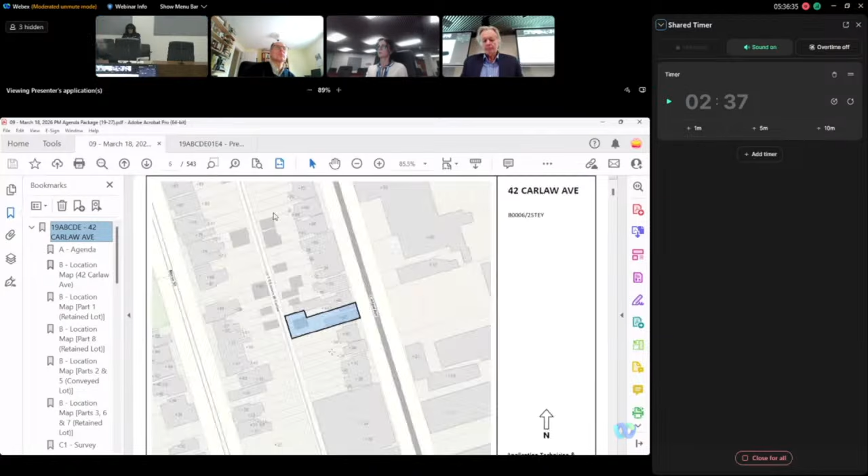Okay, do we have the agent? Through you, Mr. Chair, we have the agent online to speak, and we do have a registered speaker. I'm just making an attempt to connect with them. Sorry, the agent is online? Yes, hello. The agent is online, yes.

Hello, good afternoon. Name and address, please. My name is Ron from Seven Design, and the address is 42, 44, and 46 Carlaw Avenue. Okay, we only have someone registered to support this, so...

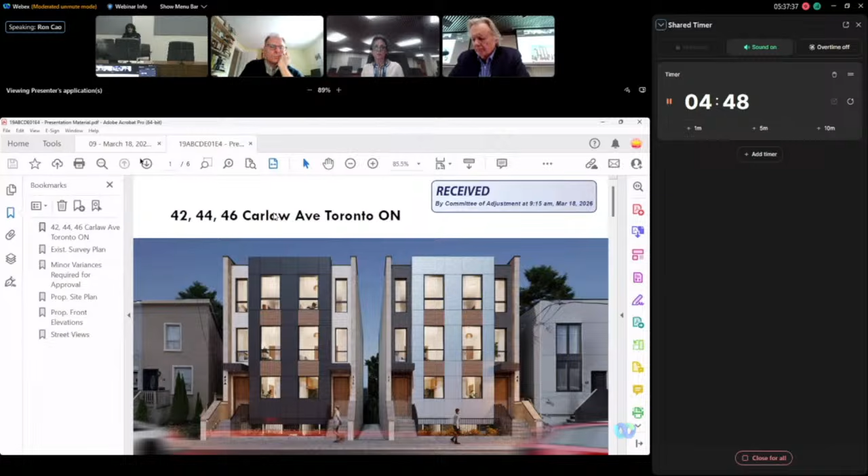It is a complicated one. Maybe you could just give us all a bit of an overview of what you're proposing. Yeah, sure. So just some background: 46 and 44 Carlaw Avenue are 2-story semi-detached, and 42 is a 2-story detached dwelling. So the proposal is to combine 3 properties, divide them into 4 lots, and construct 3-story semi-detached duplex dwellings on each lot. As for today, we are requesting 3 minor variances related to lot frontage, mean wall height, and building depth.

So the first item is the proposed lot frontage of 4.79 meters, where 6 meters is required. This reflects the existing lot condition, and with the reduced lot frontage, the design still provides a functional dwelling consistent with the neighborhood.

And the second item is the building depth. The proposed building depth is 19.48 meters, where 19 meters is permitted. This represents a very minor increase of 0.48 meters, with no negative impact to the adjacent properties.

And the last item is the mean wall height, at 10.81 meters, just slightly above the permitted 10.5 meters. The minor increased height is because the design intends to raise the basement level closer to grade in order to improve the natural light, and also, as per the TRCA requirement, all the basement windows need to be located above the floodplain, which also adds to the overall height.

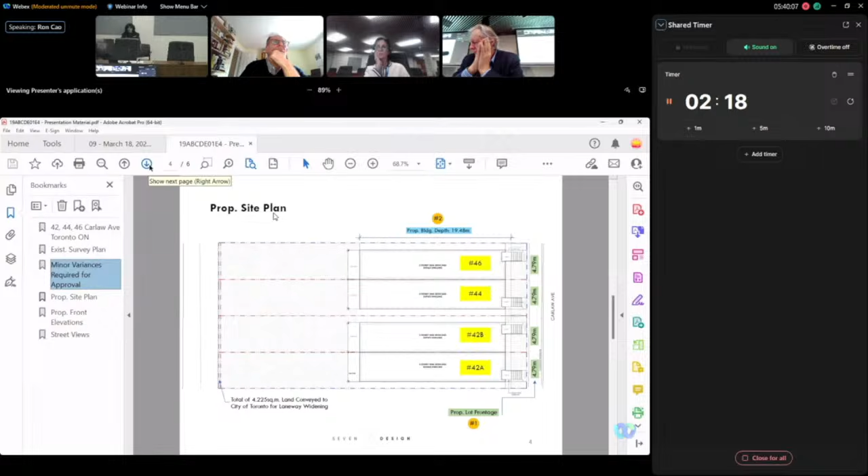It's our opinion that the proposed design represents a practical and balanced approach that fits within the existing neighborhood. We believe the 3 variances are minor, as they maintain the general intent and purpose of the zoning bylaw and official plan, and also meet the 4 tests of the Planning Act. Thank you for your time, and I would be happy to answer any questions.

Great, thank you very much, sir. Panel, any questions? Just a couple.

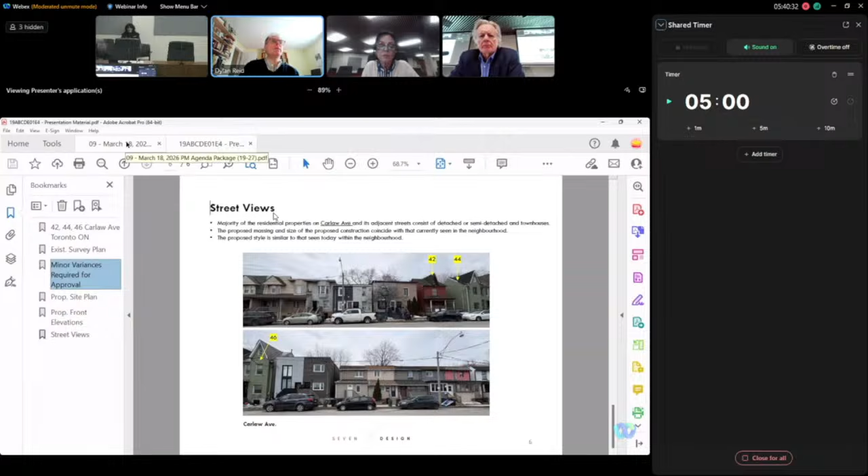Just a quick question - there's no stairs from the back. How are people going to be accessing the rear yards? Is it through the passageway between the two houses? Yes, they do have access from the ground floor. There's stair access to the ground floor.

Okay, I didn't see a door in the plans. This is a sliding door. So does the sliding door go to a balcony? Is there going to be one?

So the sliding door goes to the back deck, but are there stairs from the back deck down to the actual rear yard? At this moment, we might add that during the building permit stage - we're not sure yet about the landscaping design, so we haven't decided what to do with it.

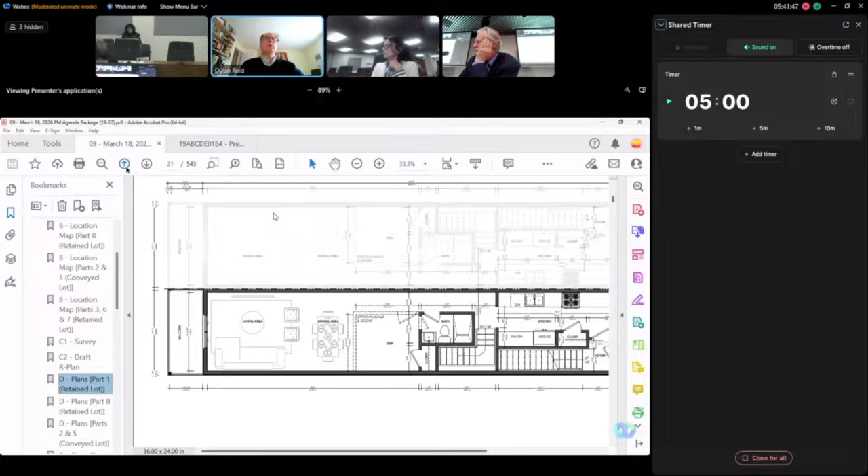I was just wondering because there was no obvious access. The other question is, how are you planning on managing the garbage bins? So basically, we're thinking to have the garbage bin located at the back of the property.

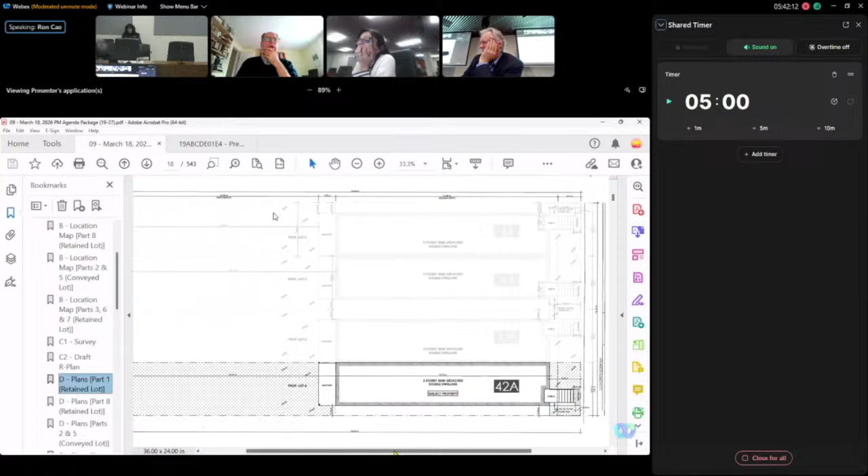Okay, you've got lots of space back there. Is there enough space along the sides for the bins to be brought forward, or will there be a paved pathway between the front and back? Yes, the minimum setback between the property line and the proposed dwelling is 0.9 meters - about 3 feet - so it should be more than sufficient to pass through.

At the moment you have soft landscaping at the front at that location, but I assume you can make that change and still be within the front landscaping requirements. Right, we try not to have any garbage bins at the front of the house - it's better for appearance. You have stone there. Also, if you look at the rendering, it's better appearing without any garbage bin and stuff like that.

Yeah, I think that's great - I just wanted to have an idea of how that was going to be managed. Okay, thank you very much, that's all I have. Anyone else? No? All right, thank you very much, sir. Thank you, we're in committee.

Did we want it? Was there a supporter we wanted to hear from? Oh, there's someone in support. Pardon me, thank you, Dylan. Yeah, did we find him?

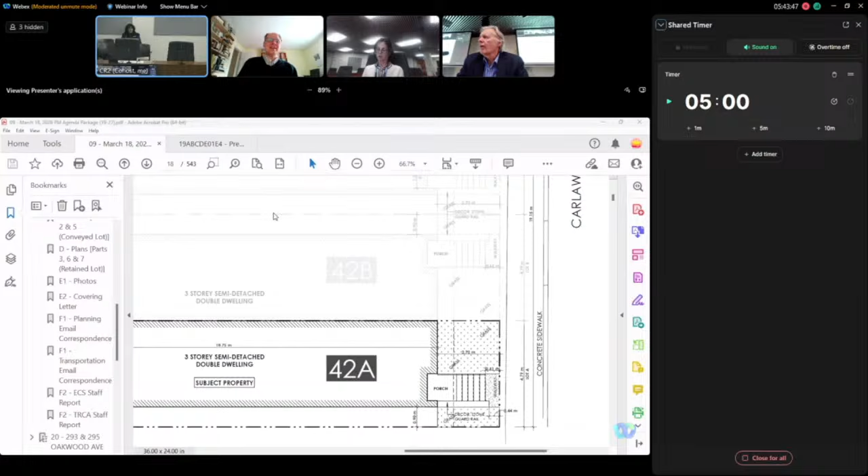Okay, I think we'll just assume that the individual is supportive. All right, let's go into committee.

Yeah, I'm happy to speak to this. I think this is a really good proposal. I'm impressed - first of all, I love having real duplexes. So often we used to see a basement apartment and then three stories, and it's not really a duplex. These ones are real duplexes, which is really nice to see, honestly. Also, there's no side yard setback issue - they've actually set them a decent distance from the neighbors, which is great. And they're actually spacious, giving good space for people without taking up a small location. Honestly, except for the actual width of the lot, the two variances are really minor. So I think this is a really good proposal, and I'm happy to support this.

All right, why don't you turn that into a motion, Dylan? Yeah, sure, I'll move to accept this proposal with the engineering conditions, development engineering conditions. Okay, motion by Mr. Reid, seconded by Ms. Crawford, all in favor? You have your approval, sir, thank you.

All right, item number 20, 293 and 295 Oakwood, has been postponed.

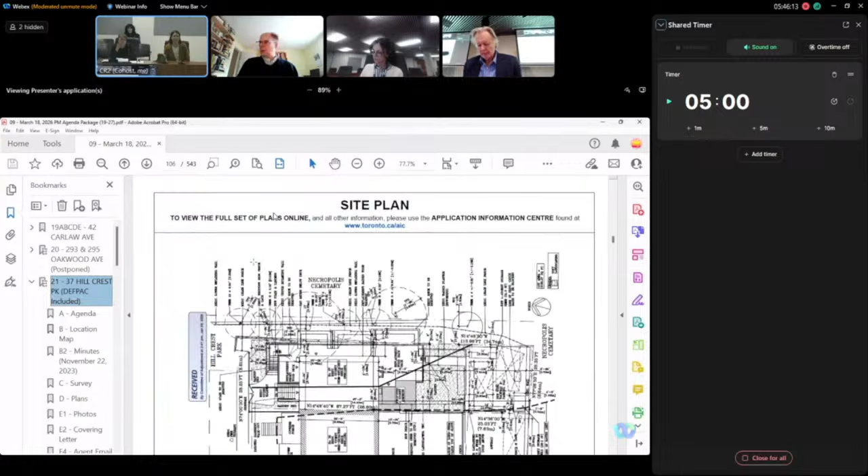Item number 21 is 37 Hillcrest Park. This is an application to alter the existing 2-story semi-detached dwelling by constructing a rear 1-story addition, also to reconstruct the wood deck and to construct a rear yard parking pad. Committee has before it a copy of the minutes from the November 22nd public hearing. We have a copy of plan of survey, site plan, floor plans, and elevations, 8 photographs of the subject property, a covering letter from the agent, letter and photo from the agent, another letter from the agent to the neighbors, supporting materials from the agent. We have email correspondence from Heritage Services and from Metrolinx. We also have staff reports from Urban Forestry and the TRCA. We have correspondence in opposition from 33 and 35 Hillcrest Park, and materials in opposition from 35 Hillcrest Park. That's it.

Hello. Is your mic on? Now it is.

My name is Monica Kuhn. I'm the agent for the owner. Sarah McCarty Carton is beside me, she's one of the owners.

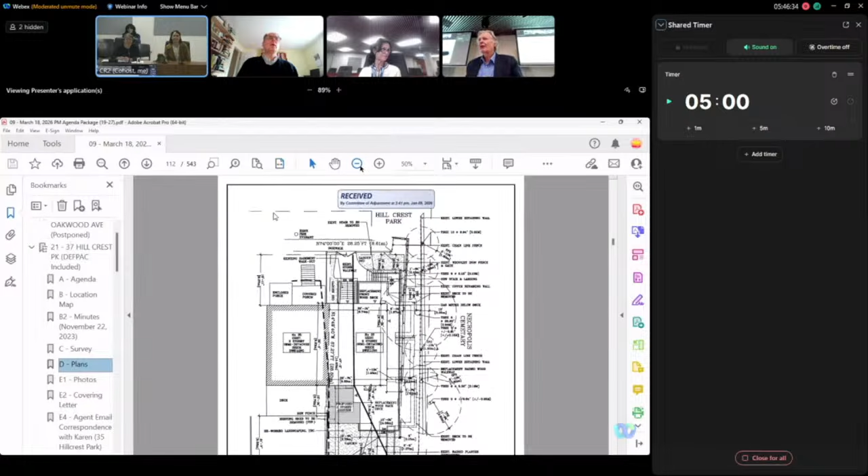Okay, well, we have some folks who want to speak to this item, so we'll need a presentation.

So just to give you a bit of context, this property is at the end of a row. It faces a park, and to the north, east and south it's surrounded by the Toronto Necropolis Cemetery. This whole row has no street access facing the park, so the fronts all face the park with no street access, and there's a laneway in the back. Because our property is at the end, our property is longer, so we captured the end of the laneway in the property.

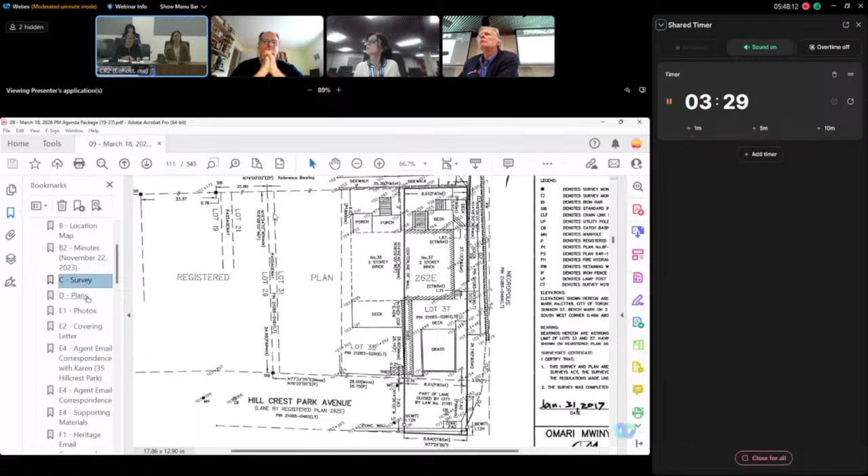Also, a bit of history. The previous owner of this property liked to do things on his own without any approvals. Not only did he build a string of sheds along the shared property line with number 35, which also go over the property line onto her property, but he also built a deck along the east side that goes over private property onto city property, without a permit. Part of our original work was talking to the city to see if they were interested in selling that piece of property, and in the end, the decks are starting to rot, and we really need to replace them, so we are just going to replace them on private property and get rid of all of that overhang.

It's part of a ravine system, so we have to deal with TRCA, which you have documentation about. They are in agreement with where and what we're going to be proposing. So that's a bit of the history of that.

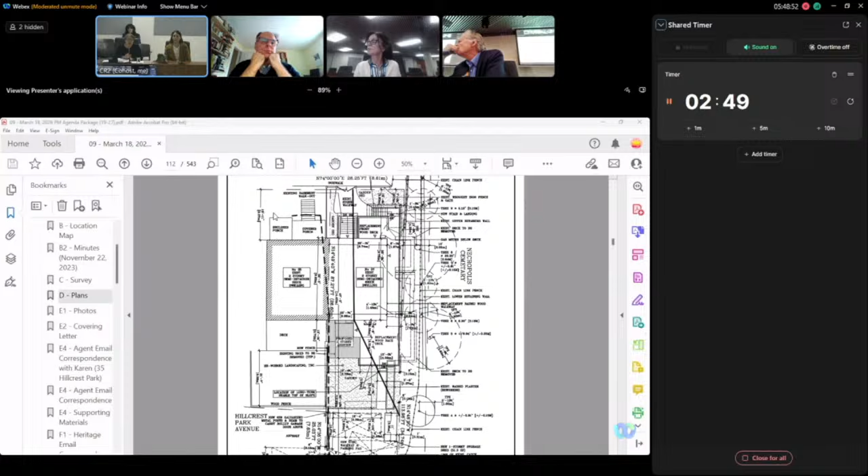We came to you originally in 2023 with a rear addition as well as a laneway garage and laneway suite at the back. Due to budgetary constraints, we're now just coming to you with the rear addition and the reduction and reworking of the decks. To be very clear, the rear addition has no variances, so we could go tomorrow and get a permit for the rear addition.

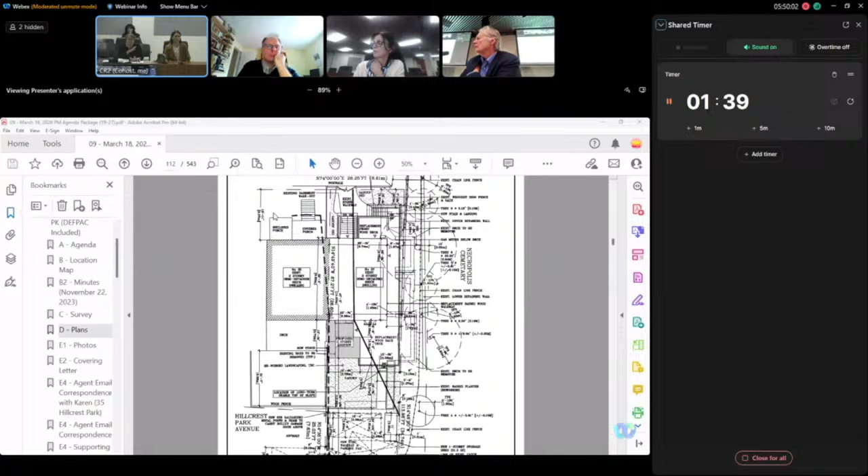The variances have to do with the decks and the landscaping. Right now, the property has not much green space at all in the back. There's a wide deck that goes across the back of the house, then there's an area they use as a patio covered with gravel, which is not soft landscaping, and there's already a double parking space at the back at the end of the lane, like an extension of the lane into the property. So with our proposal we have attempted to increase the amount of soft landscaping both at the front and at the back.

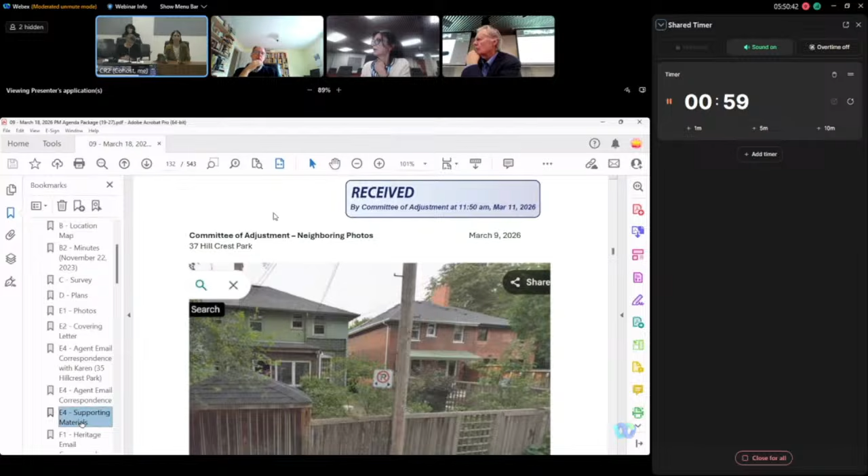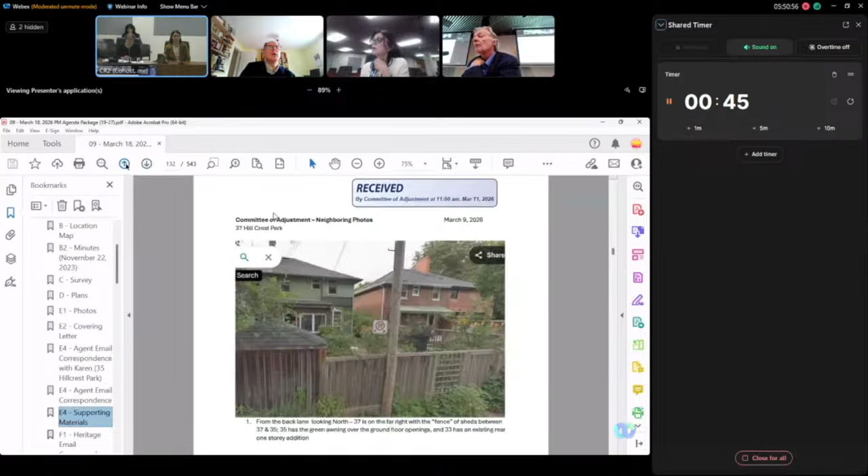All right, let me quickly go through. You've got the letter that we sent to the neighbors. The first variance has to do with the rear deck side yard setback - typically the deck needs to be set back 0.9 meters from the side property line, and we're proposing to take it in to just 0.15 meters from the east property line. Right now the deck extends over that property line, probably another 6 feet or so into the city property, so we're going to be cutting that back. Variance to the side deck side yard setback...

Same thing - it can encroach into the side yard 1.5 meters as long as it's no closer than 0.3 meters, and we're going to be encroaching 0.66 meters, but will be 0.24 meters from the east property line. Again, that deck currently extends over the property line into city property.

Rear yard soft landscaping - the zoning bylaw requires 50% of rear yards to be covered with soft landscaping. Currently we only have 10%. With the situation I told you - we've got the parking already, we've got the gravel terrace, and we've got a deck - we are now proposing to increase that to 29%.

Variance number 4, front yard soft landscaping. The zoning bylaw requires 75%. Currently we were at 56%, and we're going to 65.2%, with a reduced front deck.

Number 5 is the standard TRCA requirement to be set back 10 meters from the top of slope. The top of slope right now runs right through the middle of the existing house, so their requirement to us was to make sure we did not pass that top of slope line with the addition, and they have approved the location and size of our proposal.

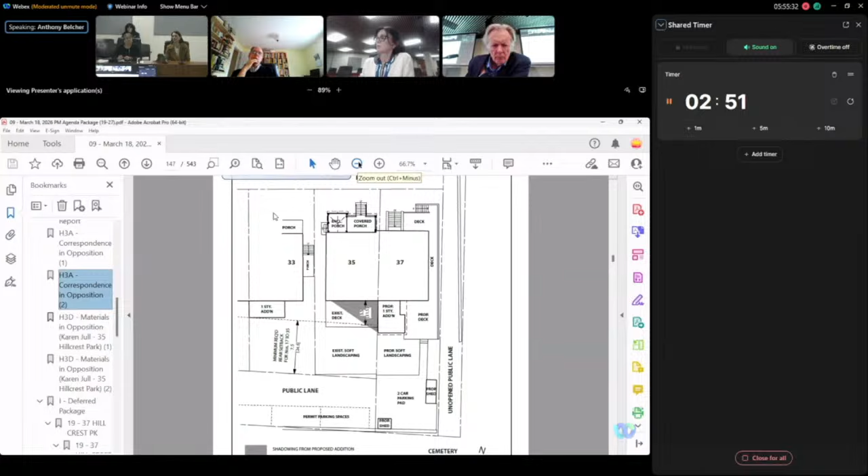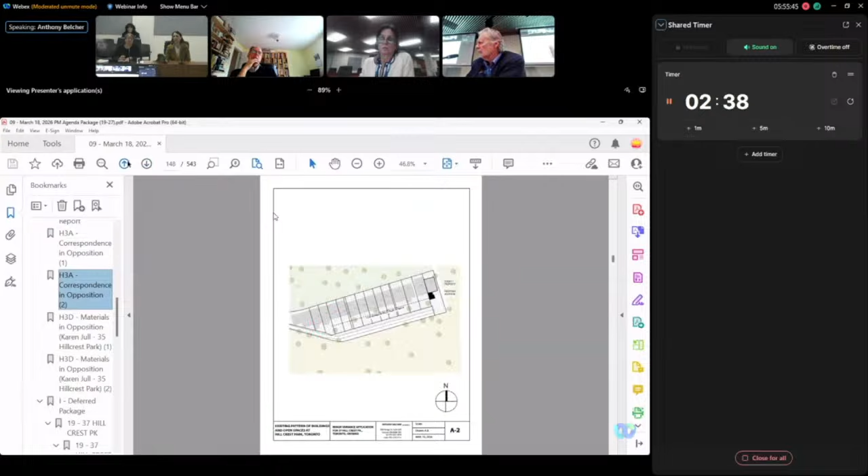Currently, only 28.6% of the rear yard would be maintained as soft landscaping. A building permit for the rear addition would only be issued if the two proposed sheds are deleted and the areas of the two-car parking pad and/or proposed rear deck are scaled back. Currently, the parking pad and proposed deck together make up about 55% of the proposed rear yard area. By choosing to make a deeper rear addition, the applicants have reduced the overall area of the proposed rear yard, thus exacerbating the insufficient percentage of soft landscaping.

With a greater rear yard depth, they ought to be able to comply with the bylaw requirements for rear yard soft landscaping.

There's a context map we could look at, that one there. So a large majority of the properties in the row do have rear yards which comply with the minimum required 50% soft landscaping.

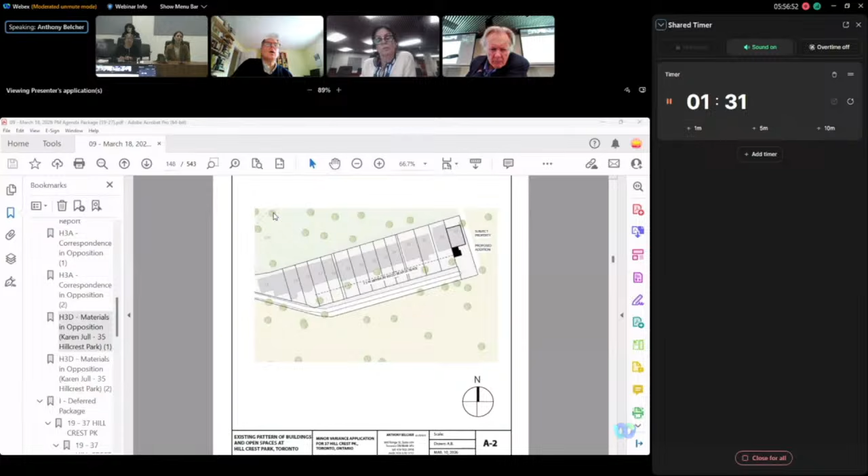Of the 14 properties, 9, including numbers 33 and 35, use permanent parking spaces on the south side of the public lane. They do not park in their rear yards. One, number 11, parks in its side yard. The remaining 4 have parking in their rear yards, and all but the subject property only have a single car parking pad. Only the subject property has a double car parking pad.

Both my client and her neighbor at number 33 oppose variance 3 of this application based on the proposal's nonconformity with the existing neighborhood pattern for depth of rear additions and percentage of rear yard soft landscaping.

By refusing variance number 3 related to deficiency in rear yard soft landscaping, this committee will require the applicants to revise their proposed site plan so it complies with the zoning bylaw. Such changes might well include reducing the depth of their proposed rear addition in order to increase the overall proposed rear yard area. From my client's perspective, that would be a good outcome to ensure her continued enjoyment of her property.

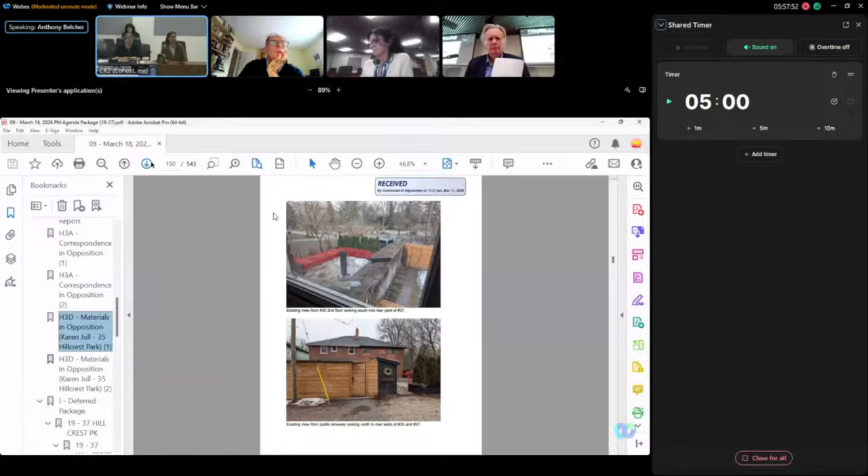Good afternoon, Karen, you've been unmuted. She's just the observer? She's the owner, right? I think Anthony was speaking on her behalf. Okay, that's right, all right, okay.

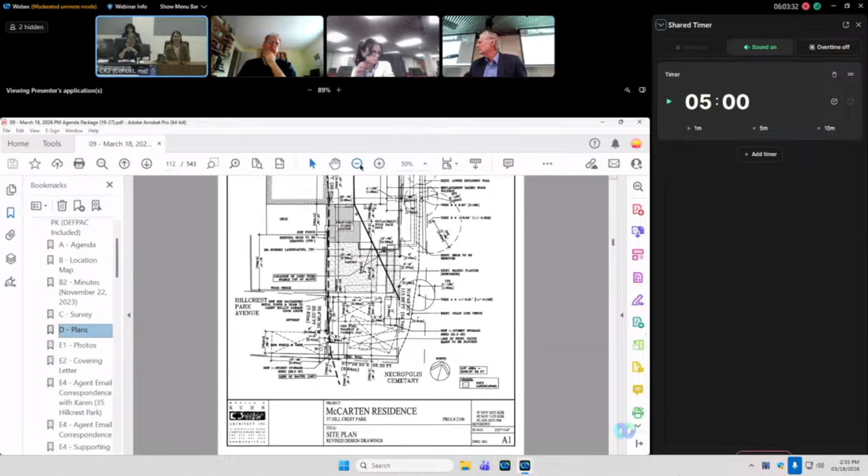As well, regarding this anomaly of the row at the back—there's nothing to say that one property can't be bigger than another, and the zoning bylaw relates to the size of the property, not how big the neighboring properties are. Further down the other end of the lane, the properties are a very different size, much smaller—they don't even have backyards because the laneway cuts right behind the houses. So I'd say this row is not uniform in the least at the back.

In the front, certainly facing the park, it's pretty uniform, except for the neighbor at number 35, who has the only front addition combined with a front covered porch in the whole row as well. So again, we're talking anomalies.

Can't have it both ways. Anyway, I think that's enough. All right, thank you. Thank you. Any questions of the agent?

Dylan, you okay? Yep. All right. Thank you very much. Okay, we're in committee.

I'll just say that if we do accept the variances, I definitely think we should include a condition for permeable pavers for the parking spots. Yeah, I would agree, I thought this was a reasonable application. I think the agent stated, and I think she's right, that the small addition is basically as of right, if it wasn't for the landscaping, the incursion onto the backyard and the impact on landscaping. But the fact that it's improved over the existing, and with permeable pavers for the driveway, I think it's quite satisfactory. It also is surrounded by green space, creepy green space, but green space nonetheless.

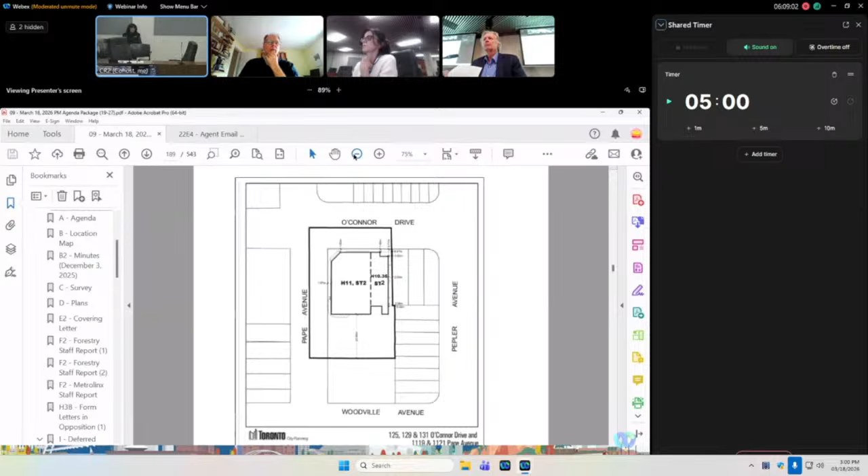Committee has before it a copy of the minutes of the December 3rd, 2025 public hearing, copy of the plan of survey, site plan, floor plans, and elevations, a covering letter from the agent, email correspondence with the zoning examiner, staff reports from Urban Forestry, and an advisory report from Metrolinx. We also have correspondence in opposition from 133 O'Connor Drive. Through you, Mr. Chair, we have the agent online to speak for this item, and we also have a speaker in person and online for this item. Okay, if we can have the agent, Mr. Palumbo.

Good afternoon, Mr. Chairman, members of the committee and Committee of Adjustment staff. My name is Andrew Palumbo of Ian Hall Planning Limited, and I am the planner and agent for this application. My address is 38 Betty Nagle Street in Toronto, Ontario.

I will try to be brief. This application was deferred back on the December 3rd hearing to address comments from city transportation staff, who requested that one accessible parking space be added to meet bylaw requirements, eliminating the variance to reduce accessible spaces by one. My client accommodated this, and the proposal now provides the required 2 accessible parking spaces, so that variance is no longer applicable. It's just the 2 variances for height, as I will explain.

For background, back in 2019 the city enacted a site-specific official plan amendment and zoning bylaw amendment approval for the subject lands, allowing a 2-story commercial building up to 2,000 square meters in size, whereby the approved second story was only a partial story.

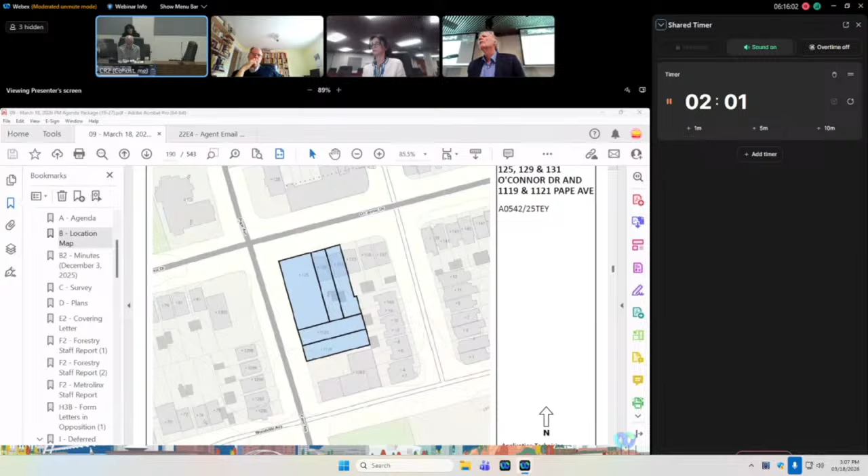For these reasons, I respectfully submit that the proposed commercial development of this vacant property should be reconsidered in favor of utilizing existing vacant properties within the area, and also taking into account the two very large developments going on at Pape and Cosburn. Thank you. Thank you, sir.

You live one street over. Is there an impact on you from this? Yes, the back of our property - my life partner is with me - the back of our property is on that lot. So you would face this property, the rear would face it? Yes, correct. Our back fence would be on the property line.

So you're unhappy with them doing a 2-story building here. What would you prefer seeing? I was hoping you would ask me, Chairman. I was hoping those two very large commercial developments I mentioned, which have large residential areas in them, but neither of those buildings come close to meeting the parking needs for their residents. So I was going to suggest the city should purchase a property and develop parking only, no taller than 2 levels, as a parking facility for residents in the area given the new development going on. So you'd prefer a parking structure to this building?

Yes. All right, thank you. Thank you, sir, thank you for your time.

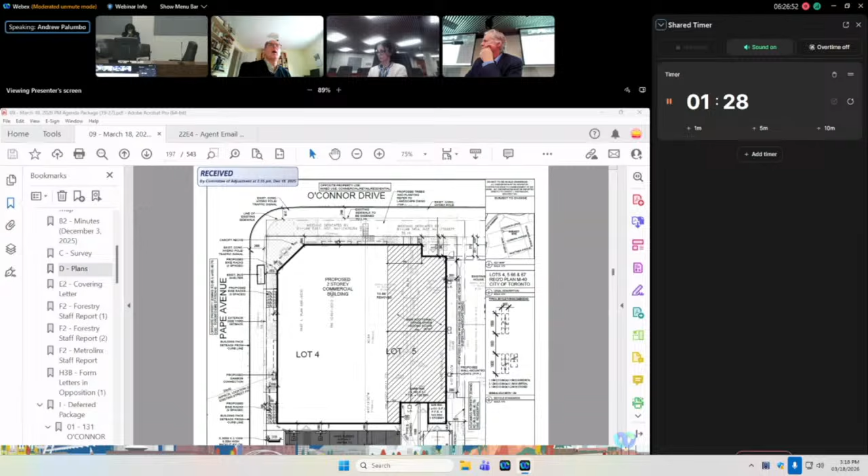One last thing, Mr. Chairman, is that we have worked in close conjunction with city planning staff. I know they haven't submitted a report, neither opposing nor supporting, but we have been in contact with planning staff to try and get this vacant site developed and moving forward, because there is an open SPA application that they would like closed, and this is just the one step that stands in front of that.

I was just going to give you the opportunity, I think you've already done it, to respond to the committee's direction during the deferral that you try and address as many of the concerns of 133 as you could, and it sounds like you've spoken to that already.

Yes, Mr. Chairman, I did submit a letter. That was a point-by-point letter that spoke to the points that the deputant from 133 raised. And like I said, happy to try and be the point of contact for that individual going forward until it reaches a certain point where I, as a planner, am no longer involved.

And the individual who spoke that lives on Pepler raised a number of options. I assume in your business plan and modeling you've already considered those, and this is the site you're proposing to develop on.

Absolutely, my client has chosen this site. As I said, this has been vacant for some time, and it's just a matter of getting, in the market that's there, the commercial market specifically, it would be good to have a tenant eventually have a site to come to now in this particular corner.

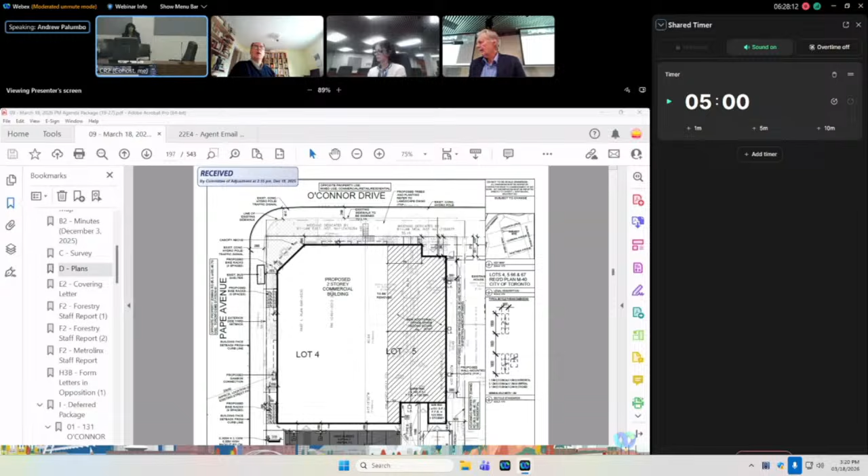All right. Okay, thank you, sir. Any questions of the agent panel? I can't see, Dylan. I'm here. Welcome. I just have a couple of questions.

First of all, I guess I'm assuming that the original bylaw was to step down towards the residential spaces. Is that why they had that? Okay, and just for added context, Mr. Reed, I've been involved with this application since it was originally submitted. As far as I'm aware, my understanding is that the main reason this additional GFA is being requested is that there's a commercial tenant that basically needs it.

So given the change in policy direction, the fact that a 6-story building is now contemplated here as of right, this is just a minor addition in the context of that city policy change. So originally was it a response to local comments? Yeah, and that was actually established through comments from a working group.

Okay, thanks. And I noticed that you have actually stepped back the building a little bit where it meets the residential spaces, is that correct? There's a little notch on the north and south ends. That is correct, just to not make it so massive, so to speak, and to continue to provide that transition. Right, okay, thank you. All right.

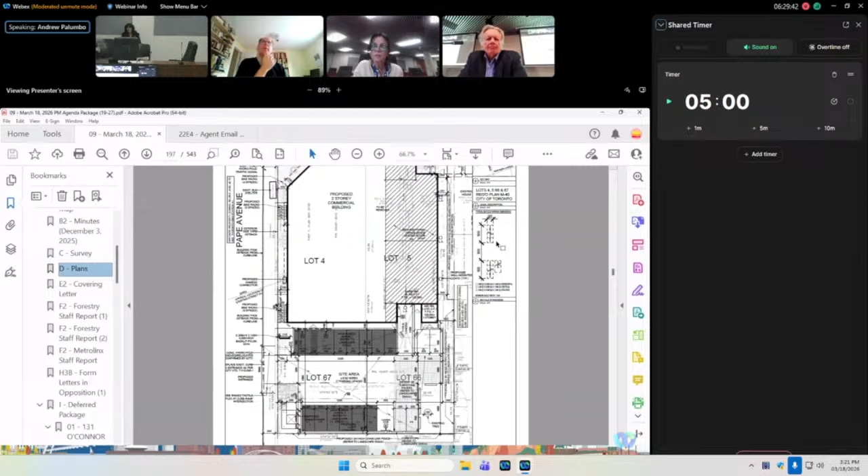Okay, if no further questions, then let's go into committee. I'm happy to take this one. I know this site very well because I often drive by it, trying to get to the DVP. This has been vacant for a really long time, and it's at the intersection of 2 major streets. It's really good that this is being developed, and I think it's excellent to see this moving forward. And that stretch of Pape is a little underused, but I think this may actually help address that issue.

I would also say I agree the context has changed. The city is very much encouraging larger developments on major streets, and this is still only 2 stories. I also point out, I understand the houses beside it are currently bungalows, but basic zoning would allow houses of almost this height to be built there, should someone want to. So it's really no higher than a house would normally be. I think it's entirely reasonable, and I'm happy to move approval of these variances.

All right, there is a forestry advisory and a Metrolinx condition? No Metrolinx, just advisory? Yep, just advisory. I think the forestry is just advisory too, right? Yeah, it is. It's not a condition, okay. Correct. So I don't think there's any conditions. So do we want to... yeah, okay. Motion by Mr. Reed to approve, seconded by Ms. Crawford. All in favor? You have your approval.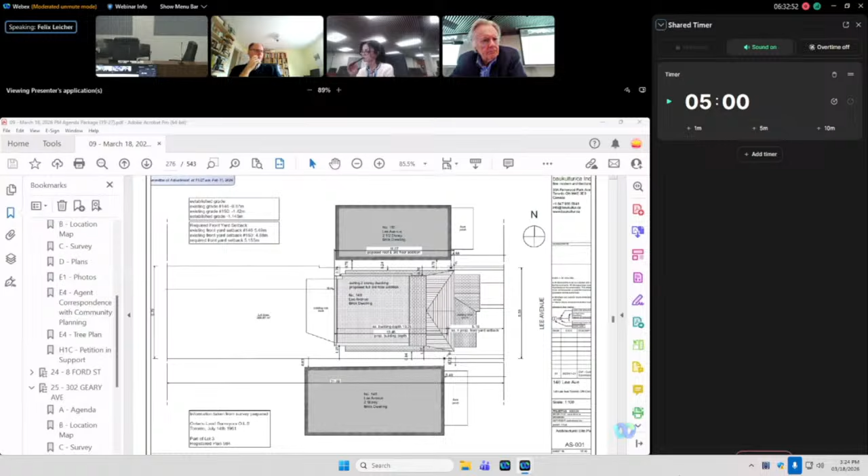Okay, panel, does anyone need a presentation on this one? No, I don't think so. Okay sir, we've read your application, we're familiar with the material, we don't need a presentation today. Is there anything you'd like to share with the panel before we take it in for a decision? I believe you have all the necessary information that the materials have provided. Okay, all right, thank you.

All right, we're in committee. Ann, you want to take this one? Sure. I'd like to put forward a motion suggesting approval of this application. There's some increased height in the back, but no significant massing or change to built form. The depth and the rear yard setback are much less than as of right. It's been discussed with community planning and all the neighbors are in support, so there's no adverse impact.

Okay, and you're making a motion to approve? Yes. All right, motion by Ms. Crawford to approve, seconded by Mr. Reed. All in favor? You have your approval, sir. Thank you.

Move on to item number 24, 8 Ford Street. This is an application to convert the existing rear one-story ancillary building into a two-story ancillary building that will contain a laneway suite, occupying the north portion of the ground level and the second story, by constructing a second-story addition with a second-story balcony. There will be a total of 3 residential dwelling units on this lot. Committee has before it a copy plan, survey, site plan, floor plans, and elevations, 4 photographs of the subject property, email correspondence from Transportation Review and from Metrolinx. We also have correspondence and support from 6 Ford Street, right next door.

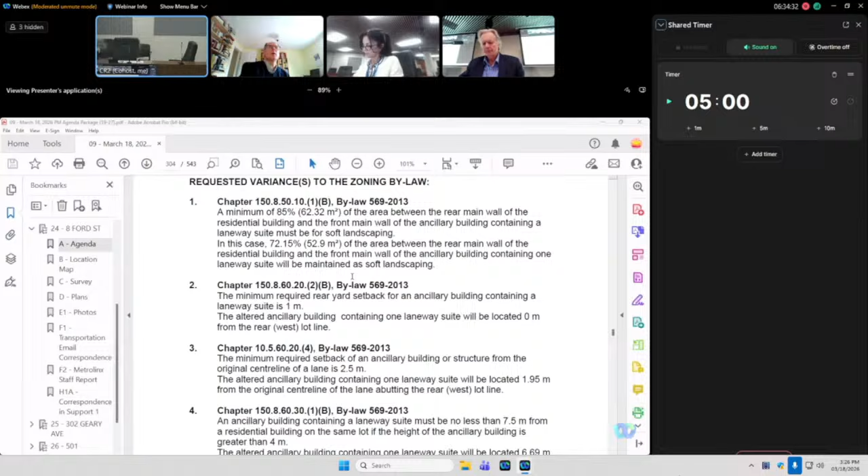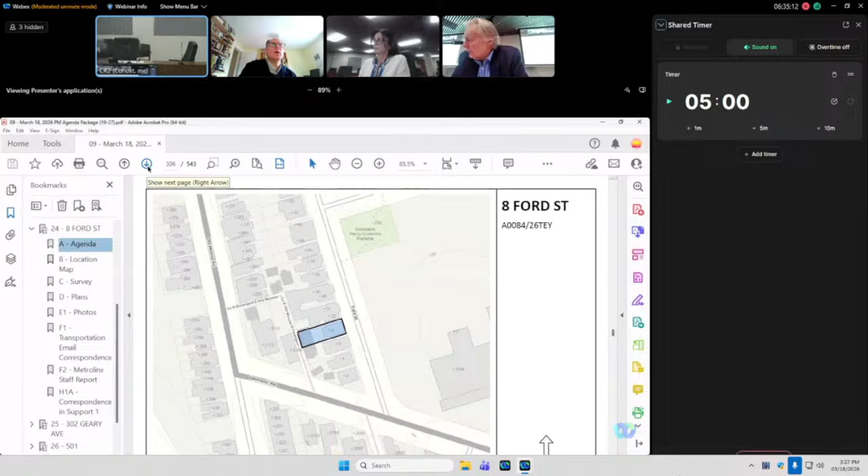Okay. Panel, does anyone want a presentation on this one? No, we don't need one. So, Mr. Lopes, we don't need a presentation today. We've read the application, we're familiar with the material, and we may have questions. Is there anything you'd like to share with the panel before we do that?

Just final remarks. Absolutely, this is a very unique situation. We did our best efforts to create a very straightforward application that you have before us. And yeah, very simple.

Panel, any questions? Seeing none, all right, let's go into committee. I think it's a fairly straightforward application.

So I move for approval of the application, the conversion basically. The variances are minor. There's a bit of height in the ancillary building, but they're achieving another residential unit. And there's support from one neighbor. I think there may be a condition, or maybe it's just the warning condition from Metrolinx. Otherwise, I move to support.

Motion by Ms. Crawford to approve, seconded by Mr. Reed. All in favor? You have your approval.

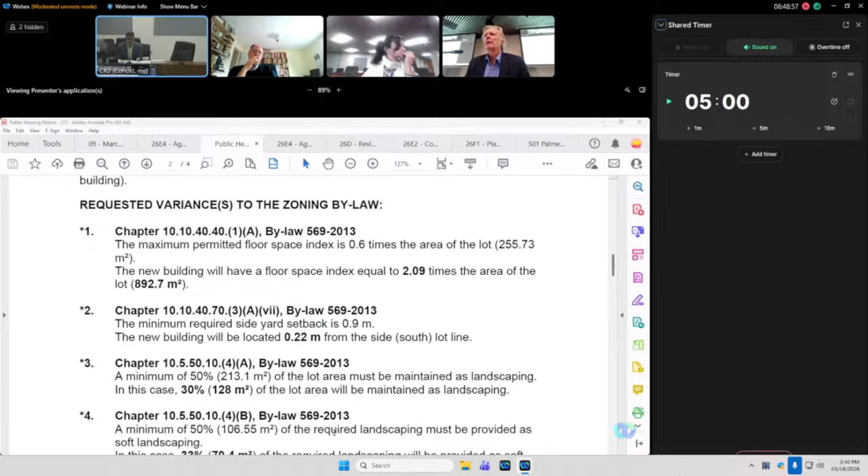Yeah, through you, Chair. We initially - I don't remember the exact date when they were all submitted - but that description wasn't updated after we provided the new plans. I believe the new plans were provided end of February at some point, or something along those lines. I mean, you can check online.

So like it didn't happen like 2 days ago? No, it's just that the description. No. Okay, hold on. You guys, hold on a second - on the public record you'll have your opportunity to share your thoughts. I'd ask you just to kind of keep quiet for now, please.

Sorry, sir. Yeah, I can pull up the exact date if you'd like of when the plans were changed. You probably have them because they usually stamp when they were accepted by C of A. Yeah, we initially had submitted with the same plans as a placeholder, and then we amended them to this revised application. I am going to, at some point when you have an opportunity, I would like you to confirm the date that those plans have been made public.

Do you want me to do that after the presentation? You can do that after your presentation. No problem. Yeah, but there was plenty of time.

Through the chair to the agent, it may be prudent to go through the red line public notice that you submitted. Staff can pull that up on the screen so you can clearly go through the variances, the changes for the record. Absolutely, and it's also very important to note that every change has been an improvement in the variances or a removal of a variance, so in no way have we changed anything that's made the proposal worse. So we'll walk through - sometimes the public doesn't always get an opportunity to see the most recent changes, so this is important from a public disclosure perspective to reinforce that.

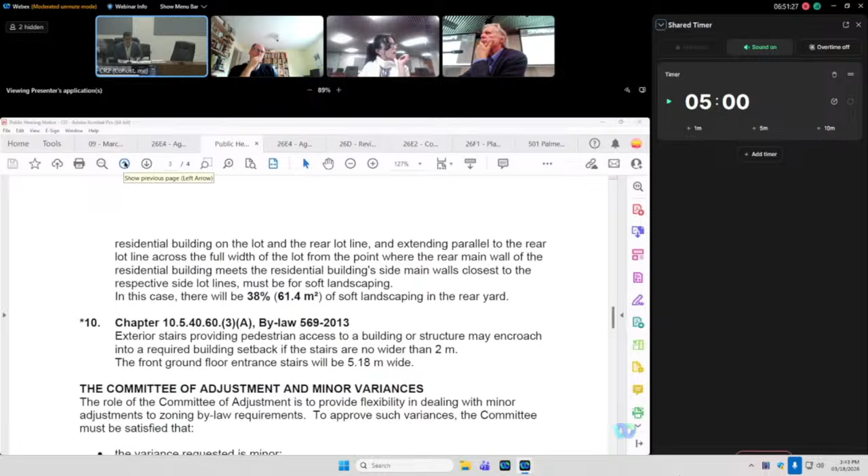There was - I believe the neighbors will bring up the fact that there was another public notice sent out prior to this, which was identical to the original hearing. But this is the one that came out, I believe, a week after that one was sent out. Okay, and this is the one that was with the new plans. It had, and where we reduced the variances further.

So you've eliminated variance 7, which is the visitor parking spaces? That's correct. So you're providing those? It's in an MTSA, which is now implemented. Fair enough, therefore they're not required. Last time when we were here in November, those were not implemented - fair enough, and now. Yeah, and then similarly, number 8, the same reason. That is correct. Okay, any other changes?

Doesn't look like it.

Through you, Chair, sorry for the confusion here. It's a little bit complicated. No, and it's important because there's a lot of people interested in this file, that we're abundantly clear. Just out of curiosity, why are the variances asterisked?

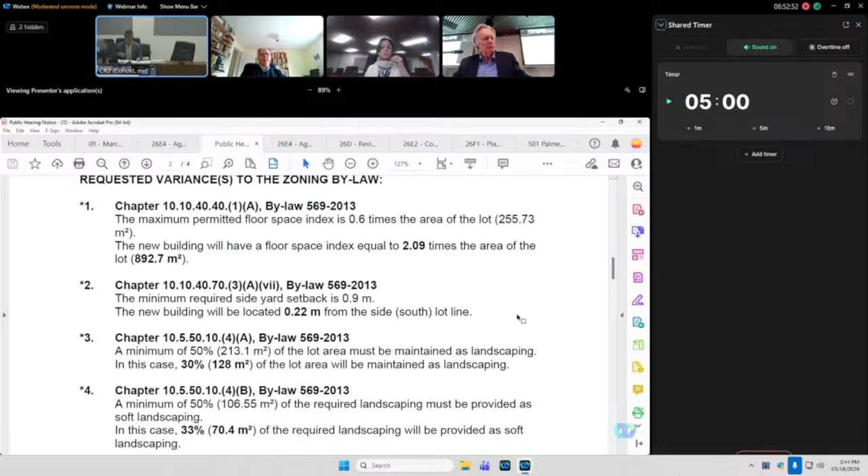Through you, Mr. Chair. Originally, staff sent out the first public hearing notice. After that notice was sent, but still within the prescribed time period, additions or changes were made to those variances, so staff was able to send out a revised public hearing notice. That's the asterisks, as you'll see - those were the variances that were changed that were sent out to the public. Subsequently, the agent further changed the variances with their red line notice dated March 16th.

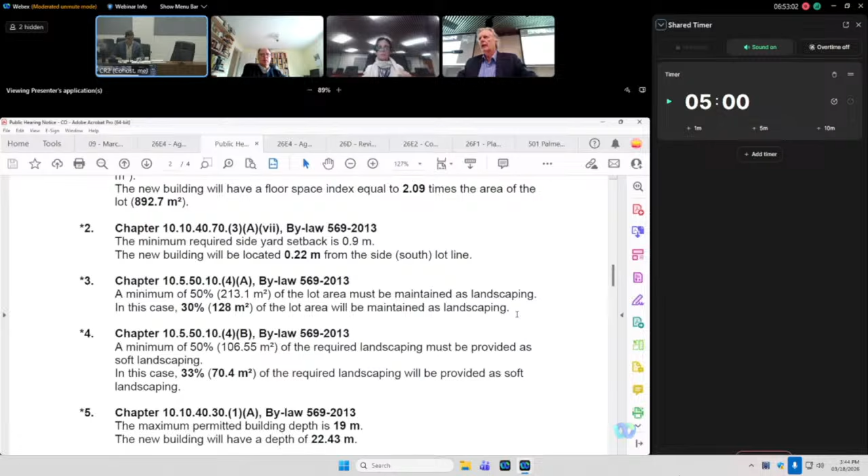I noticed in your presentation, which I will ask you to take us through, you have identified where you are now relative to where you were when you were here before the panel previously. So that's really helpful to do.

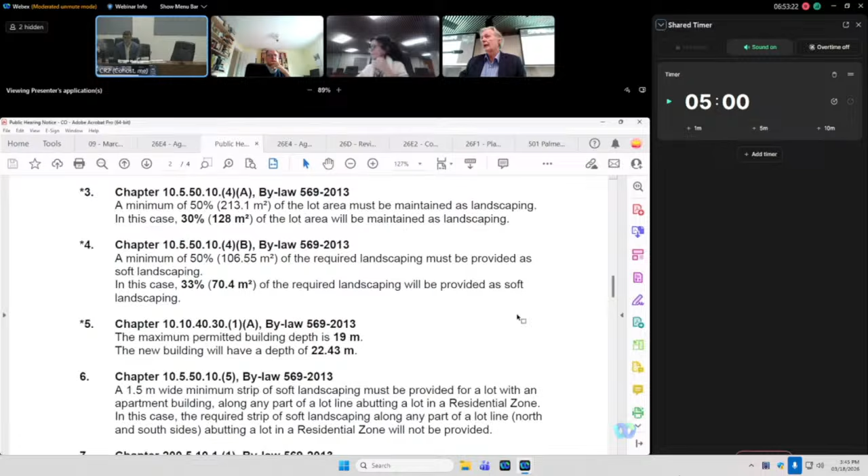Before we do that, can you talk a little bit about your application which you've set aside to go to TLAB to appeal the previous refusal? What are your intentions? Our intentions are, if we're successful today, to drop that TLAB appeal. It was out of an abundance of caution - these types of projects, time delays are very, very costly, so we filed a TLAB appeal as a contingency, right when the November hearing loss happened, and we communicated with TLAB that we would be withdrawing it if we are successful here today.

Do you still have a date at TLAB? Not yet, we told them that we're adjourning it, I believe is the correct word. Is what's before TLAB the revised one we're looking at now, or the older one? We appealed the original one, so what's in front of TLAB, we haven't done anything with that appeal, but it's the appeal of the original one. If you ended up not being successful today and went to TLAB, would you be revising to adapt to the current one, or would you stay with the original? We'd have to take that back and make a decision - I'm not sure exactly at this time.

Okay, thank you. Are there any more clarification or technical questions of the agent? I think we're good. Sir, you do have a presentation. Absolutely. It'd be great if you took us through that, please. Absolutely, thank you so much.

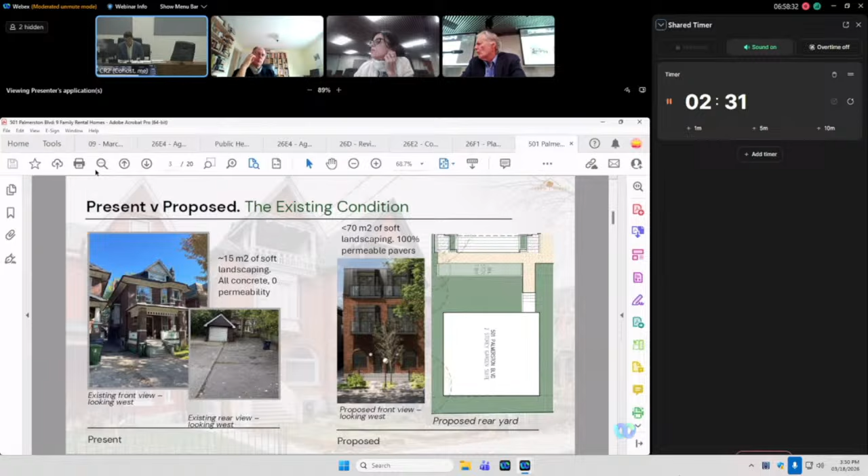In our new proposal, we are suggesting to increase the soft landscaping by almost 500%, to over 70 square meters, and have permeable pavers on all the new footpaths for entrances. We're going to improve the conditions significantly compared to what exists currently.

We have a proposed massing relative to what's allowed as of right now. This is what it looks like from a pedestrian walking by—very much in line with what's allowed. But I'd also like to point out that this is located within the MTSA. In the summer, the height allowance here is going to jump to 13 meters, so what we are proposing, at 11 meters, is going to be less than what's allowed as of right. This is what the province has mandated and what the city is implementing right now.

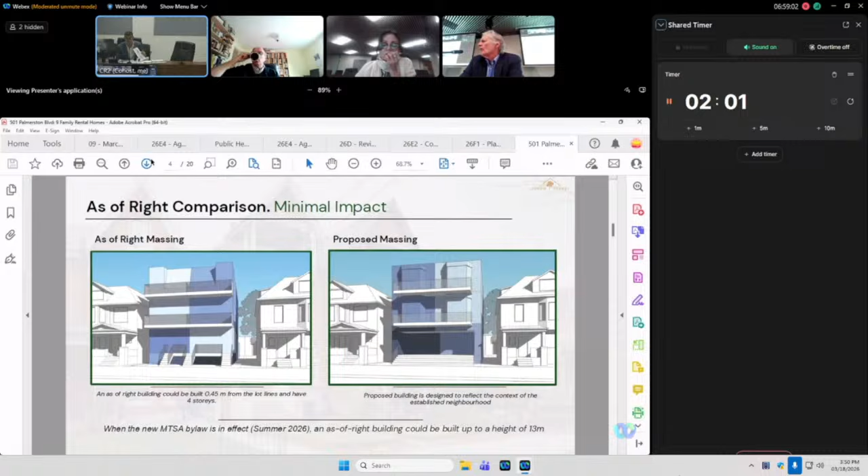We're not asking for something out of the box here—these kinds of typologies exist in the neighborhood right now. This depth exists in the neighborhood, and when you go to the corner lots, those are even deeper, around 30 meters. One more clarification relative to the previous proposal: previously staff said the as-of-right allowance of depth was 17 meters. It's actually 19 meters for this building. So we're asking for a truly minor change from 19 meters to 22.43, which is in line with the character of the area.

On the side yard setback, we're asking to match the existing condition. There are currently 6 windows overlooking the south neighbor, and we're going to be reducing that, so we're going to be improving the condition. On the right, you'll see some photos of zero side yard setbacks—the point here is we're just matching what's there right now. There are worse conditions in the area.

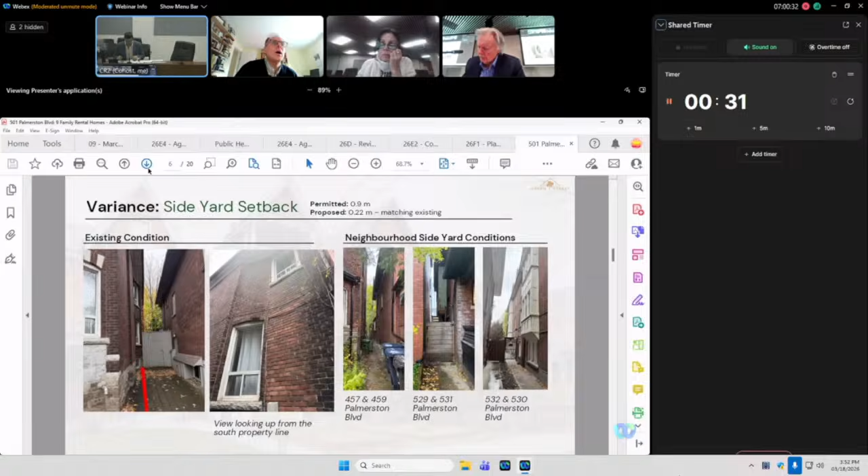We're 250 meters away from the Bathurst subway station. This is a walkable area—you can reach every single possible amenity. At the last hearing, the committee said this is a good proposal, but just not here. I'd like to push back on that. If we can't make gentle density work here, where you can walk to a grocery store, a university, a school, a rock climbing gym—literally anything you possibly would want—where can we make the EHON objectives make sense?

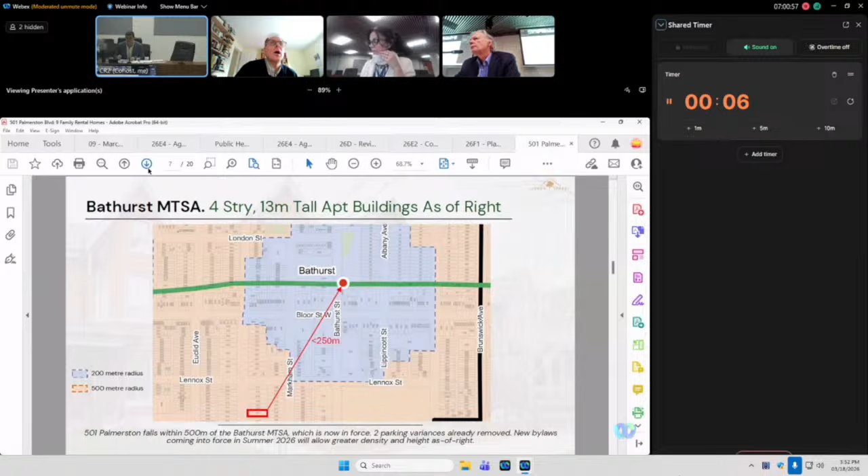Next slide is urban forestry as approved.

Sorry, I'm going to give you a little bit more time. I think you need less time than a minute—just to wrap it up.

If you go to the next slide, it's just the 4 tests. I want to say that we respect our neighbors' local engagement clearly with this process. The committee's role, though, is to evaluate this application against the 4 statutory tests. Community sentiment is important, but that's not one of the tests.

We've demonstrated that what we're proposing and the variances are minor. We're matching what's already approved 2 houses north at 22.43 meters at 509 Palmerston. We're matching the existing side yard setback. We've improved the metrics across all the variances and removed 2 of them.

And in terms of desirability, we're providing 9 purpose-built rentals averaging 1,200 square feet. 4 of those units are over 1,800 square feet in size. We're greatly improving the soft landscaping and permeability of the site relative to what exists there today.

We're also very much in line with the intent of the official plan. We're adding gentle density and critically needed family housing to a transit-rich area and dedicating 80% of the square footage to family homes within the Bathurst MTSA, thereby supporting the objectives of EHON.

And finally, we're very much in line with the zoning bylaw intent. We respect the surrounding physical scale, provided ample examples of deeper apartment buildings. This is a form factor that exists in the area today. We're conforming in heights, stories, and coverage.

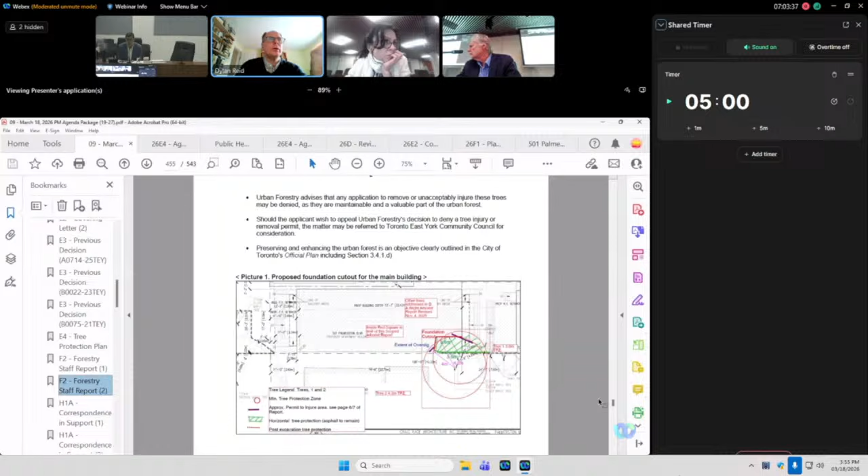So doesn't that mean that you're also going to impact one of your units? Because don't you have a unit in the basement there? Well, we'll have to plan around it. The issue is we don't know exactly where the roots go. There's concrete in the back right now, so the roots might go further or not, depending on where they go, we'll have to adjust. That's part of the process when we're doing the building permit.

I see, so you may have to adjust, but you're not sure because you don't know where the roots are going. What we've done right now is proposed a cutout that goes to the edge of the TPZs, and that is what Urban Forestry has accepted, and we'll use helical piles. There are so many unknowns when you start doing a root excavation. We'll obviously have to address Urban Forestry and get their approval again in order to get a building permit, particularly implementing their conditions, which we're very much supportive of, but there's no risk from an Urban Forestry perspective at this point.

Okay, but I just want to clarify that it looks like this would affect one of the basement units on your site. Potentially, yeah, and we'll have to plan around that. It might have to cut it down, we might have to drop a unit, but that doesn't trigger any variances, obviously. We just don't know the quantum of that cut back. What we're showing here is the maximum amount that we will, and we've accounted for that in the building process. I think that's important for everyone to understand.

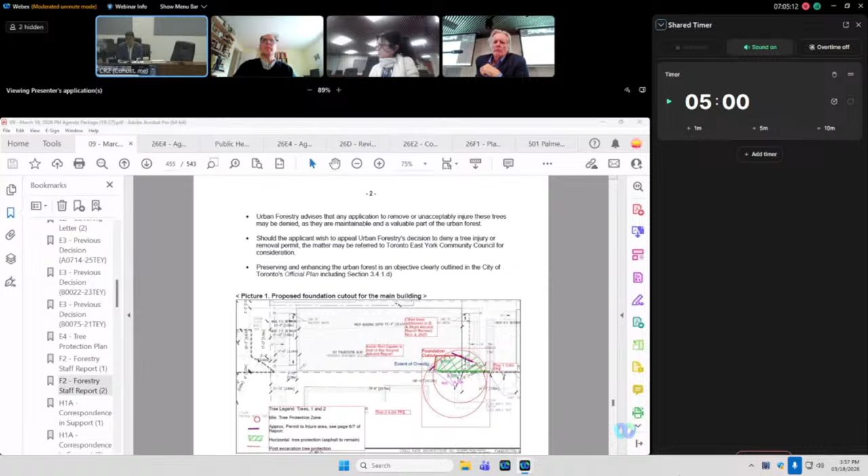Absolutely, and the building permit stage is really where we drill down on that and finalize exactly where that is. Obviously it can't be bigger than what we're asking for if we're approved here today, but the exact details will be determined at that point, including the building systems and a lot more details, frankly. Okay, thank you. No other questions? Thank you very much, sir.

Thank you. All right, we have some folks here who want to speak to this. We have speakers both in person and online. We'll start off with Dawn as the first in-person speaker. Please come up to the podium, Dawn.

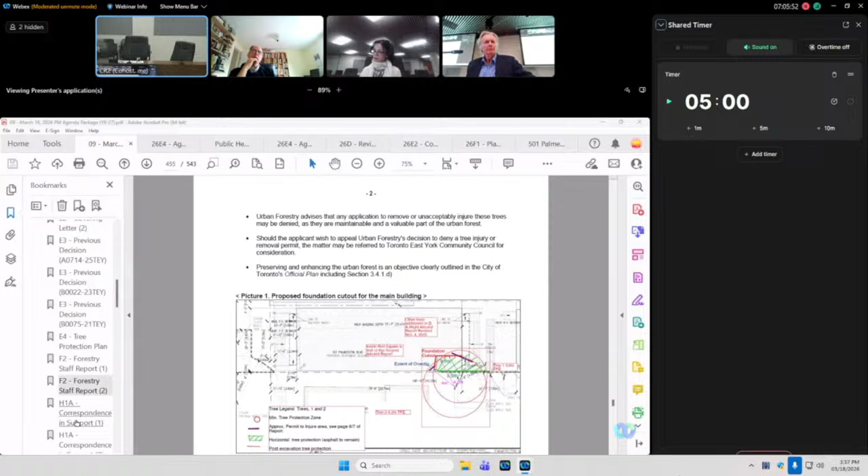Just before you start the clock. As you heard, there was significant response in the background. I do need to address that we are making comments today based on an absence of up-to-date information. We were required to make our submissions a week ago and prepare our comments to come here today, only to find that new plans have appeared as of an unknown date, which turns out to be March 16th, 48 hours ago. So this is intrinsically unfair.

No, I understand your concern, sir, and I appreciate you raising it. We will confirm with the agent when the materials were made available publicly. But having said that, let's just go through your remarks.

My husband and I are the owners of 505 Palmerston Boulevard, which is 2 doors down. The proposed variances are not minor. They have a substantial concrete negative effect on neighbors and on our neighborhood, and we ask the committee to deny the application. The project presented by the applicant, if we actually knew what it was, is essentially the same as

the project rejected by this committee in 2025, just 3 months ago. The purpose of the application is identical in that the developer is requesting variances to build an apartment building that sidesteps many of the city's requirements for apartment buildings and land use.

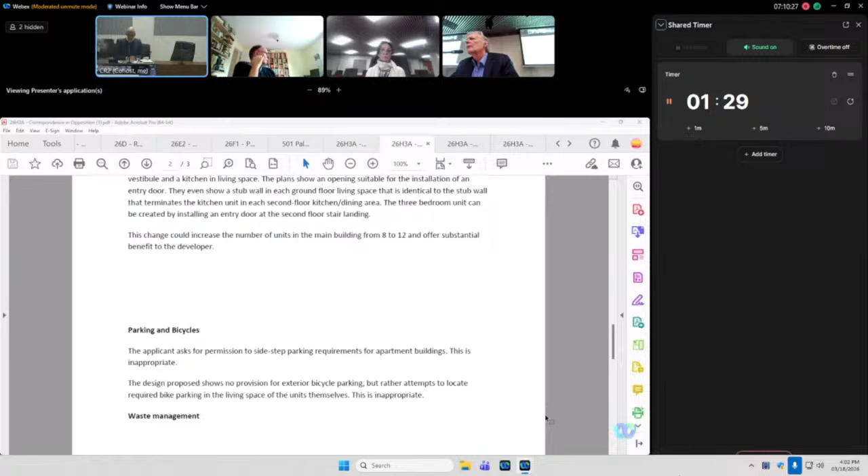With regard to waste management, the city requires waste to be stored on private property before collection. We know this. In this neighborhood, the standard is for rear or side yard storage. The submitted plans that we have seen show room for waste in the rear of the property, but if you take a look at the space as drawn, it's clearly inadequate for 9 units or more, which would require at least 27 bins.

They also show bin storage in the basement level for the westernmost units, as though anyone is going to lug their garbage and recycling bins up and down a flight of stairs on a weekly basis. I have removed some of my other comments because of uncertainty about what the actual plan is, but we do ask that the committee not approve this application unless its density is in line with city requirements.

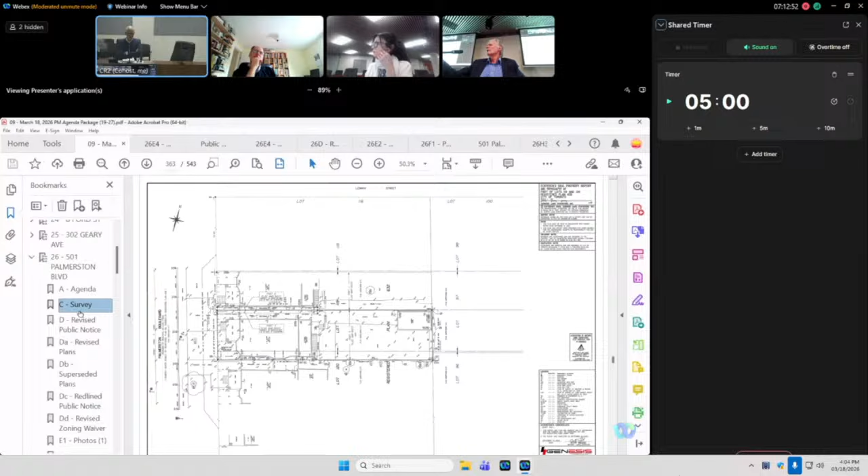As far as we can tell, the size of the building as proposed will narrow the actual driveway between the two buildings, only by a foot or so. It's already barely big enough. It's possible the driveway goes beyond the right-of-way, maybe that's what the issue is. We will ask the agent to clarify that, but when you said that, I kind of tweaked to it because that's a pretty important issue if it's actually accurate.

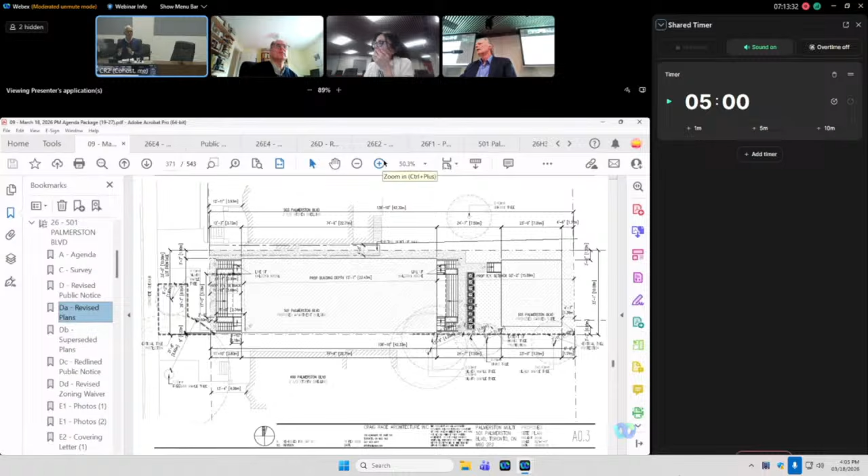Also, the other one, which impacts us for further development as well on our side, which has already been here at Committee of Adjustment, is the idea of using this shared driveway as essentially a new street. Because the only way most of these people can access their apartment units is by going down this, what is currently a shared driveway and a mutual drive.

So you're turning what they'll be walking down there, you're saying? Well, so there's no car or bicycle parking available in the backyard. Yes, they would be walking down, but there would be however many units are going to be here, let's call it 20, all of those people walking down what is essentially a shared driveway currently. Right, which would be, I imagine, 503's concern, between 501 and 503. Okay, that's great.

Panel, any other questions to the speaker? Just a quick question. You referred to vehicular access for the new building. Were you thinking in terms of the construction process? No, I was thinking of how my neighbors are going to get access, our immediate neighbors, the 503 people, some of whom have cars, how they're going to get even an ordinary sized car down there.

Or in the fullness of time, you're referring to your neighbor's vehicular access to their back. Or anybody's, meaning including, I assume that somebody else has looked at fire access to what will eventually be the laneway suite at the very back. That is a requirement of getting permission. Yeah, that's already addressed.

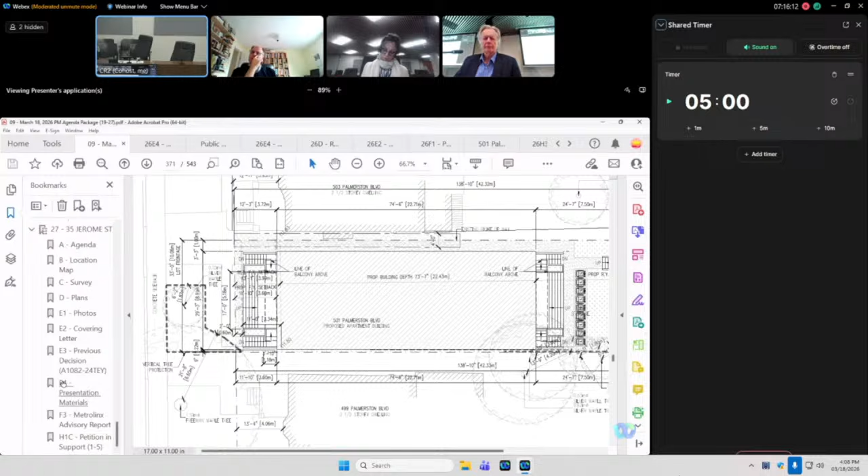Oh, here's the owner of 503. Not owner, I'm a tenant. Oh, all right, ma'am.

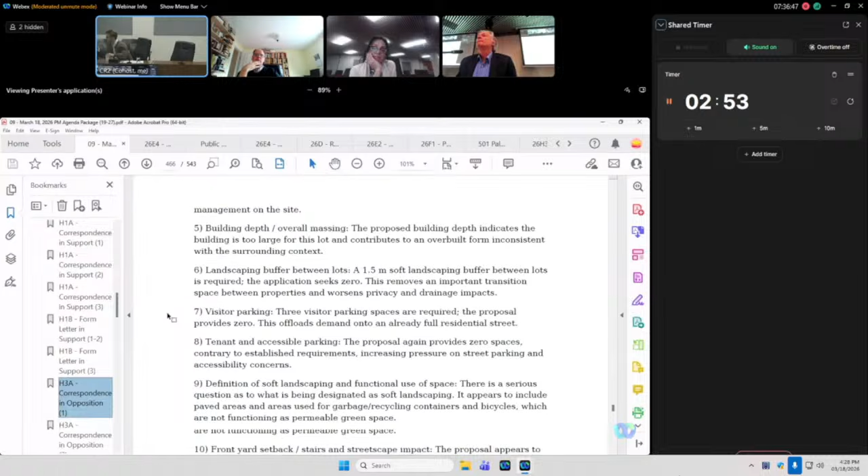Hi, good afternoon, Graham. You've been unmuted. Hi there. Okay, good afternoon, sir. Good afternoon, members of the committee. My name is Graham Lewis. I live at 472 Palmerston Boulevard.

I just want to start by saying that, yes, these plans have not changed all that much, and in fact they have introduced new issues of non-compliance, but due to the waiver of the zoning review, they have not been mentioned or discussed. And that's a bit problematic too, considering everybody is measuring approval based on these plans. I have verified, in fact, that there are certain conditions that should have been requested for minor variance, and I did review that in an informal review with both city planners and zoning.

The proposal is too intense, and people have spoken to that, but I also think it's important to note that the proponent has cited examples of apartment buildings that were built onto the street 100 years ago, in a different time, in a different era, when water had to go, or water drained right into the sewer system. I should also note that he's talking about them being deep, but all these apartments also have a laneway going behind them, and this particular proposal or property does not.

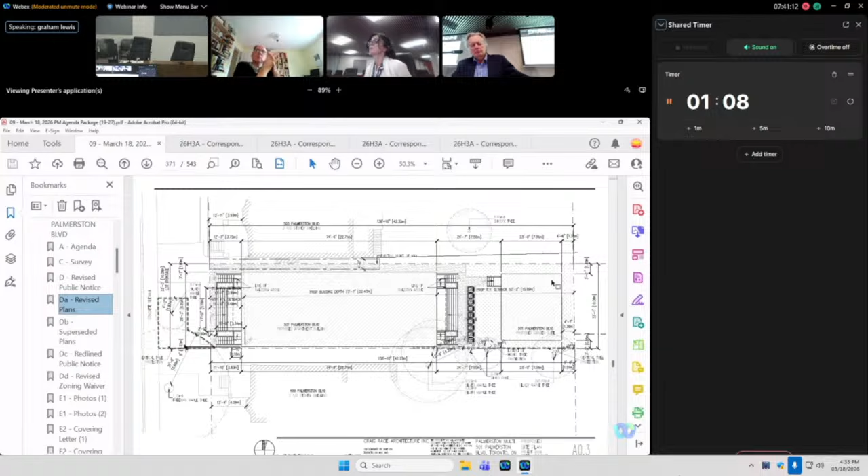Secondly, I want to talk about the 22 centimeter setback on the south of the property. There's a requirement for all tenanted basement units to have a secondary egress with 55 centimeters clearance. It's not possible for any apartment building with a basement apartment on this property to have a secondary egress on the south side and achieve this. At minimum, this proposal needs a 55 centimeter setback from the property line—double what it is—and it doesn't comply with building code. There's no point granting a minor variance to approve an apartment building that ultimately can't meet code, if the objective is to actually build these things.

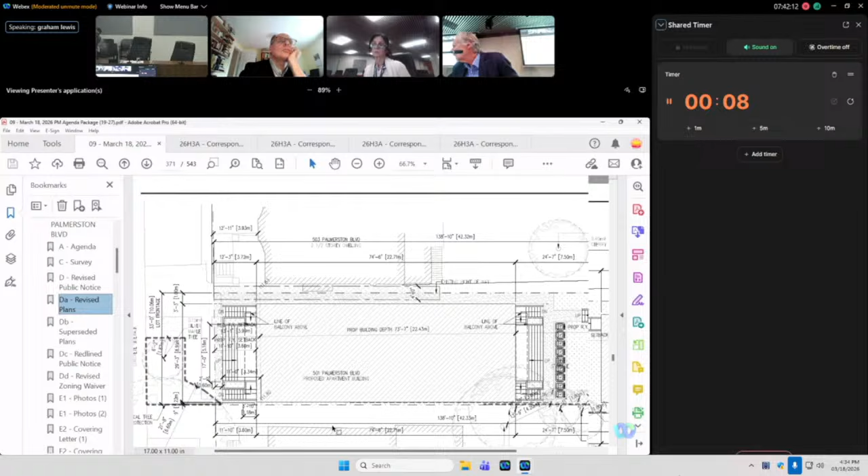Lastly, I want to talk about this easement. In the province of Ontario, the law makes clear that where easements are placed in a condition of risk, there's an obligation to consider and respect the intent and purpose for which the original easement applies, and if that condition is still valid, protection of the easement for continued use should be prioritized.

Up until recently, for decades, the mutual driveway was used by occupants of both 501 and 503. The property was owned by one owner for a long time, so the properties were merged on title. In 2021, there was an action to sever those properties, done through the Committee of Adjustment. There's an easement marked on the plan that is 2 feet on either side of the property line, but you'll notice the center line of the property doesn't follow the center line of the driveway.

The reason the 2-foot and 2-foot easement was put in place is that 503 could only offer 2 feet on their property, so quid pro quo, they took 2 feet off 501. The easement clearly stated it was for vehicular and pedestrian access. The Committee of Adjustment also included a supporting condition—I've got the language here, might as well read it—that both of the existing 2.5 story detached dwellings would be maintained unaltered. So both buildings had to be maintained, and the condition was the same for 503.

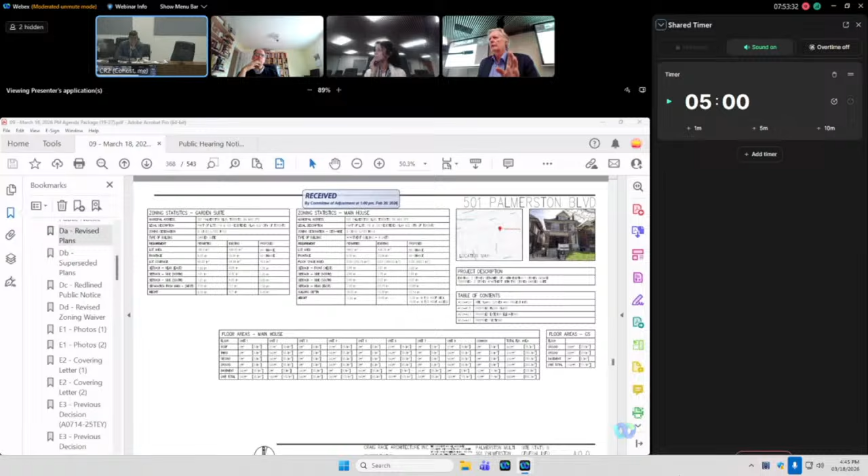My understanding, and I wanted to take that time because a lot of people raised the concern about notice or working on old plans. For our purposes, the applicant has satisfied appropriately the process and the requirements on the Planning Act for notice and change. So with that, now, if I could ask you to start your presentation.

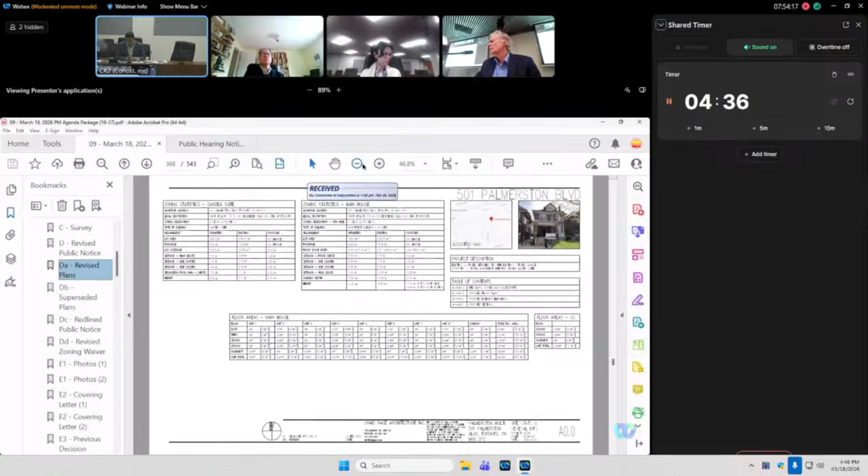Sure, I'll address one thing that came up a lot: the right-of-way. The owner of 503 Palmerston is not here. He's not speaking. There's a reason for that. We're not encroaching on the right-of-way. We have 1 meter on our property that is being used for the walkway. There's zero encroachment. We're not building into anyone's right-of-way. We're not taking anything away from anyone. If Attila, because I've been in contact with him, felt strongly enough about the current application, he'd be here today. He's not.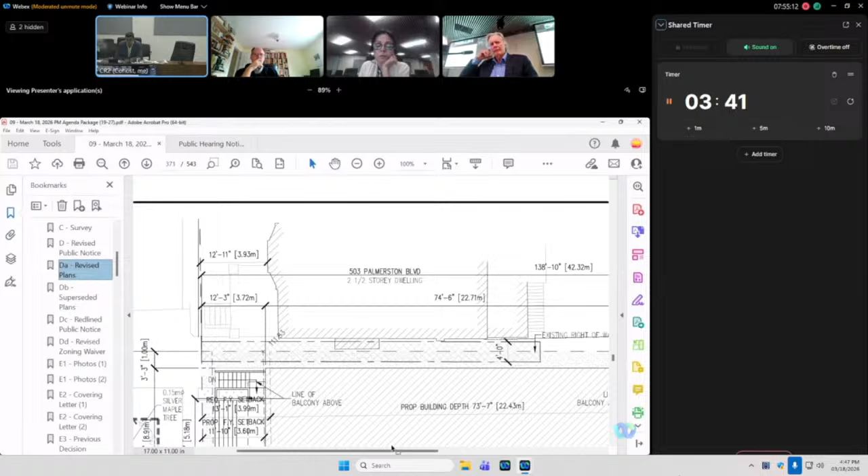And there's 2 feet on either side of the property line. That's a mutual right-of-way. Is there a little cutout into the right-of-way there? Potentially, I haven't gone into that extent, but possibly. Or something, maybe. So we are not encroaching. We have a meter between our property line and the building for people to walk. I just asked for a little bit more time because of the interruption.

I will grant that. Through the chair to the agent, can you also confirm that, please, with the survey submitted? Staff can pull up the survey. That's correct.

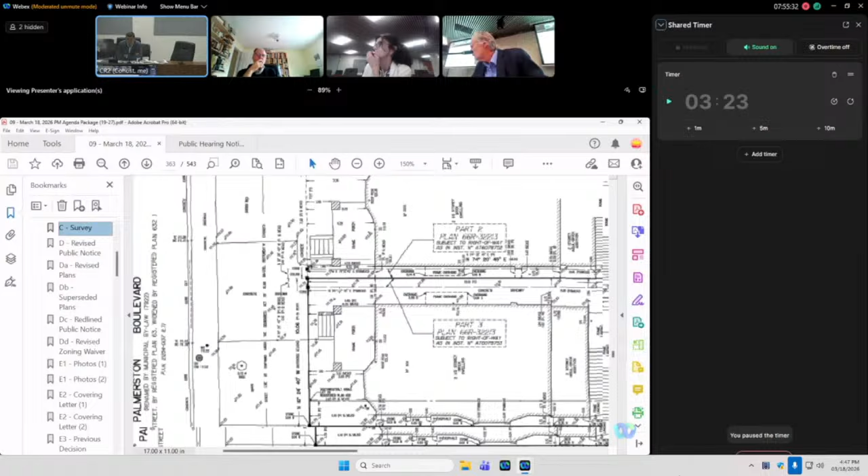The survey clearly labels where the right-of-way is relative to the current house. If you see right there, the dark line is the property line, and those two dark squares and then the punctured line thereafter, that's the right-of-way on our side. Correct, yes, thank you so much for that. And that's the mutual right-of-way that's on their side. Okay, that's fine. Thank you very much for that clarification.

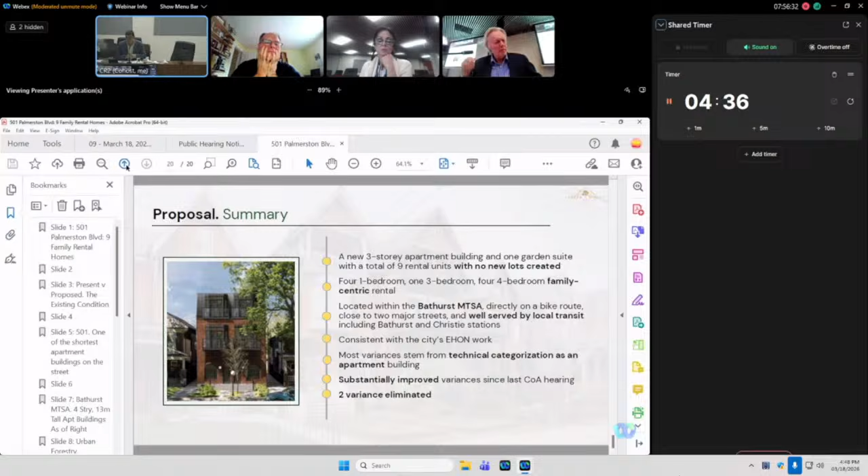One thing that was noted in terms of the side yard - if you go to slide number 6 of the presentation. That's what currently exists on the site. We're matching what's existing there. There's also a fence that I believe 499 built, which would block any access. There's no fire safety concerns here whatsoever. The entrance is off the north side. Everyone has direct access, there are balconies for safe refuge. No one is using this side right now - it's physically impossible because they built a fence - nor will they be using it in the future. So all we're doing is just matching what's there.

I'd like to draw your attention one more time to the existing condition, on slide 3 or 4, where it's completely paved over. There's no permeability. If people are really concerned about permeability and stormwater runoff, we're improving it. This is the worst condition possible you can have for that. If you go to the next slide, there was talk about fitting into the context of what exists there and what's allowed there, particularly of importance. If you look right and left, we're fitting in perfectly. Frankly, you could argue that the as-of-right is larger and more imposing than the proposed massing. And again, you'll be able to go higher in the summer because the province has mandated that needs to happen.

I want to say thank you to all the neighbors, frankly, but it's clear we all care deeply about Palmerston Boulevard. Listening to the concerns, it feels like we are being asked to choose between two versions of the neighborhood. We can choose a neighborhood that looks exactly the same as it did decades ago, frozen in amber if you will, because we are afraid of incremental change, or we can choose a neighborhood that is alive, evolving, and thriving, like the last speaker alluded to as well. And I choose the latter as well.

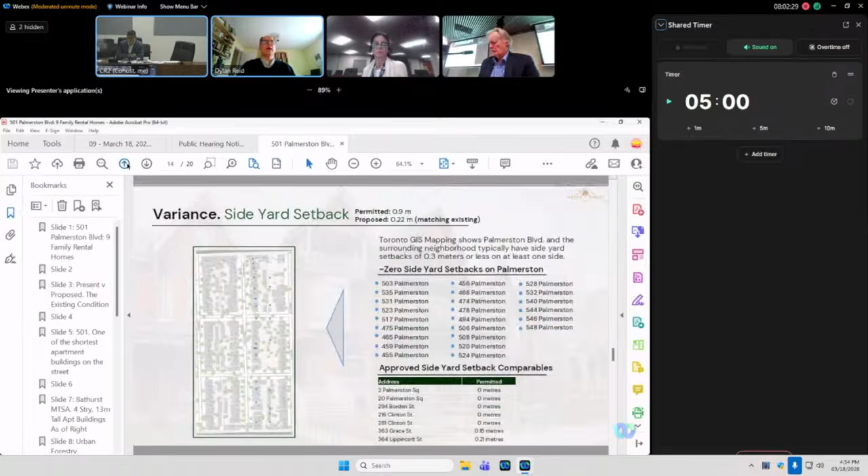The first one is about the nice rendering that you have in your presentation today. It has bay windows, but the site plans that we are looking at do not have bay windows. So I'm wondering, is that just a picture, or how do we know that's actually going to be part of the implementation? Sorry about that. The bay windows are part of the rendering, so that's exactly what we want to build. We want to build something that is representative of the street. We can add that as a condition that we would have them as bay windows. That's not a problem at all.

Okay, yeah, that would be helpful because the site plans that we see are obviously from a slightly earlier iteration, and they don't have that. And I do think that fits the character better. So absolutely.

Okay, thank you. Secondly, you've talked a lot about how it could be 6 units as of right, which is correct. And you sort of mentioned that you think that's not desirable, but I was wondering if you could maybe elaborate on that. Like, why not just do some larger apartments in the basement with the same number of bedrooms in the end, but just a smaller number of units?

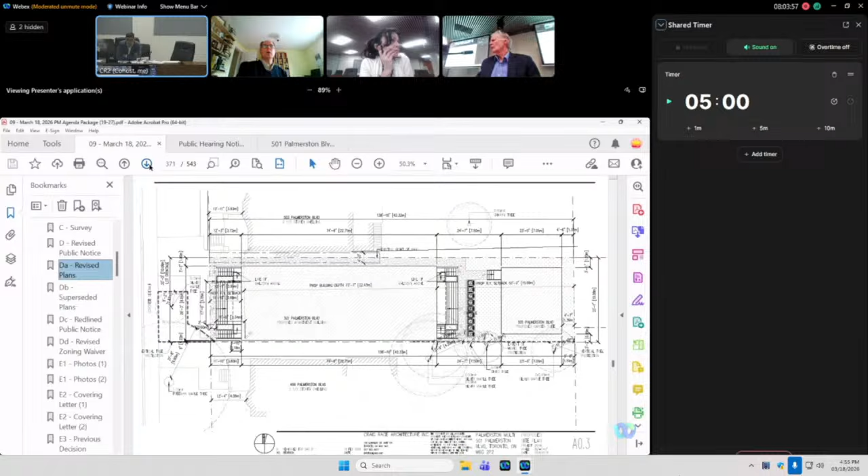Yeah, that's a fair question. I mean, the units that we're providing are 1,800 square feet. They're very large. Well, the basement ones are all smaller, right? They're all 1-bedrooms. Of course, but then the question would be, they would become part of those upper units, right? So we already have the upper units at 1,800 square feet, so it would be difficult from an economics perspective. Those units become the size of some houses in Toronto, and that becomes difficult from a rentability perspective relative to the cost of building them. It's already difficult to make the numbers work with units of this size. That's why so many developers opt to go with smaller units, because on a per square foot basis, the rentability of those is so much higher.

So what you're saying is the 1 bedroom units in the basement are easier to rent than if you merge them into 2 bedroom units. Yes, if you're talking about bridging them, there would be issues at the building code stage. The middle wall is a firewall as well as the horizontal wall, so if we did that we'd break fire compartments, which creates a building code problem. Given we've gone through this process a number of times, we didn't want to fundamentally change that.

Okay, thank you, that's helpful. More questions - the bike parking. Your original plan had bike parking in the back, now you're saying it will be interior, which one of the opponents pointed out isn't that convincing. I just wonder if you could speak to the bike parking issue.

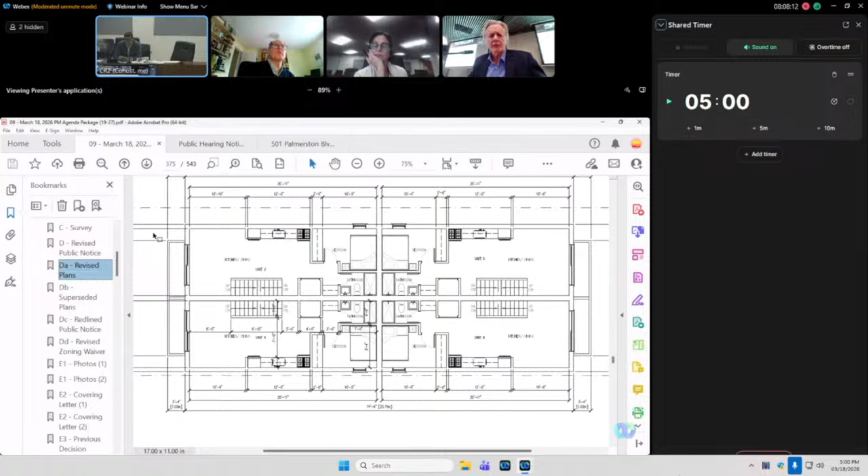Okay, Dylan, are you done with your questions? Yeah, I'm done. Anne, any questions? No. Okay.

I think the applicant has answered pretty much everything I was concerned about, so let's take this into committee. I'm happy to start if you guys would like. I'll start with some notes.

I'm kind of divided on this. I do feel it's been a bit of a chaotic process - the rendering doesn't match the site plan, and there's been last-minute changes that aren't really fair to the neighbors. I see the point about the bike parking, but I'm not convinced it's really feasible putting bikes in these fairly small spaces, although the upper units are quite large, so there might be space for that. On the south side yard setback, part of the old house was at that distance, so it's not like that was really accessible before.

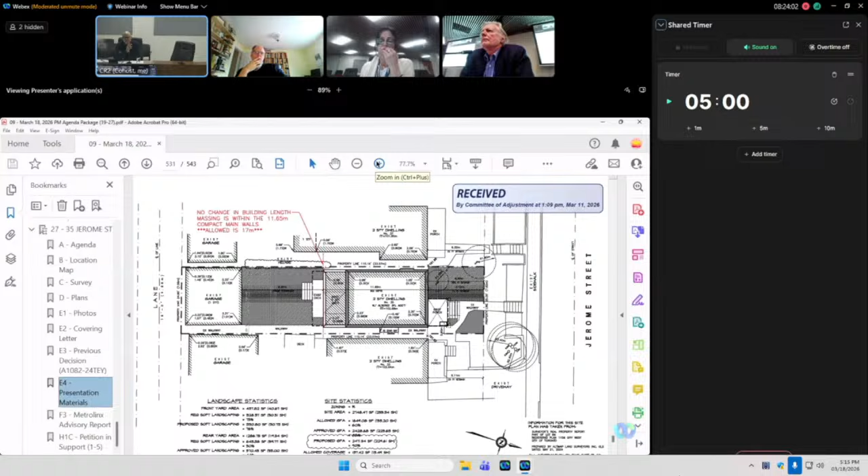During the interior design process, within the sloping roof we had a 76-centimeter knee wall going front to back, and as a result it limited the usable space within it. In this slide you can see the red dotted outline, that was the roof line previously approved at this panel. What we're looking to do is bring the walls up to square it all off, so the massing is really not that intrusive.

We had a pair of dormers that occupied 40% down the sides. By bringing it up we picked up a couple of variances, basically side yard setback, but it's exactly what it was before - we're just going straight up on those walls, but because now it's a wall, the setback is required. There's a slight GFA increase, again because the knee walls were exempt from GFA and now we get the full width of the house. And wall height is now measured because originally our side walls complied, now they don't.

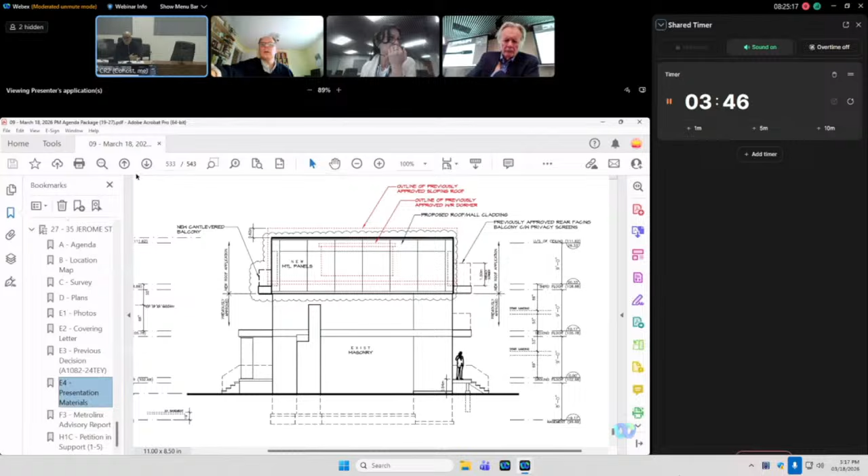The additional variances in front of you are just a carry forward, already approved in the previous application. So we went through the neighborhood to explain everything, why we're coming back. We have letters of support. If you scroll through the photographs I submitted, it also helps - we really looked at it.

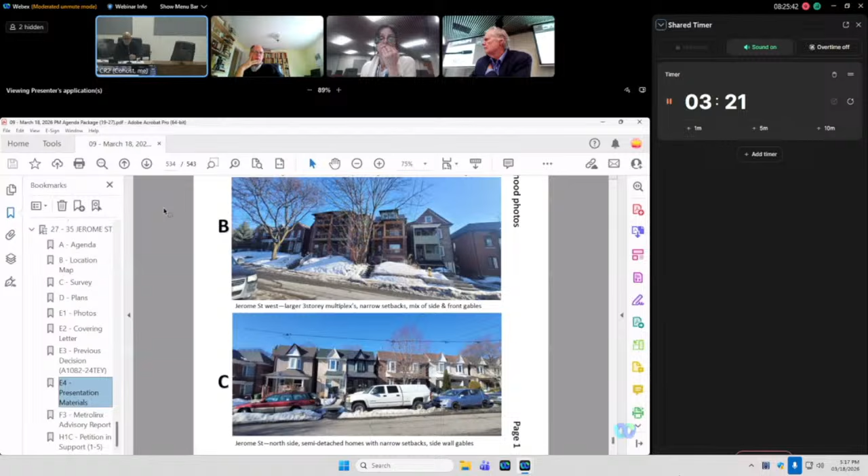The top photo there is our string of houses, typical gable roofs. Photograph B, you start seeing some larger multi-dwellings right across the street in photograph C. Now you start seeing different roof lines - here we got a sloping roof going up front, very close houses, gable sides, kind of similar to what we're doing. Next set of photographs, please.

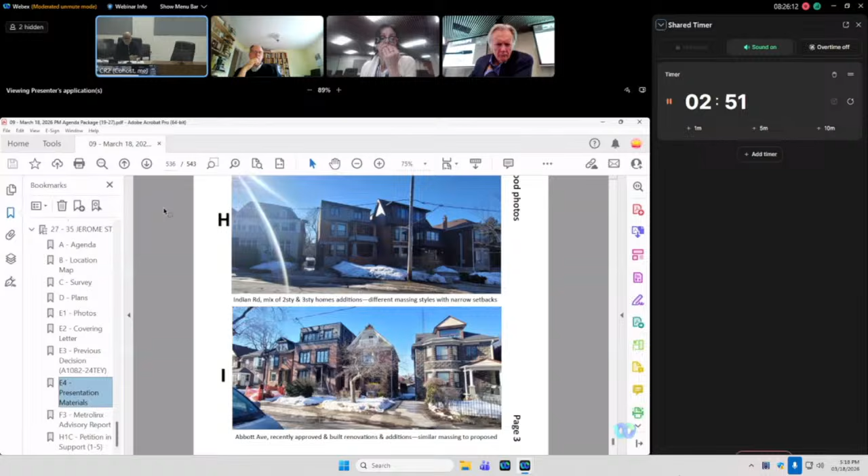As you go around the neighborhood, there's all sorts of different massings, styles and heights - semi-detached, full detached, very dense houses up and down and around, gables here and there. This last photograph is one recently approved by this panel, something we're mimicking, and you can see the result of a flat roof 3-story house compared to the adjacent neighbors - not out of character, not overwhelming, and that's basically what we're seeking here today.

Okay, thank you. Panel, any questions? We have no questions for you. All right, thank you very much.

Let's go into committee. Anyone want to take this one?

Go ahead, Ann. I do think the variances are minor and for a good reason, as just presented by the applicant, and consistent with what's happening in the neighborhood. So I could move for approval of this application.

All right, no conditions. Motion to approve by Ms. Crawford. Is that you seconding, Dylan? Seconded by Mr. Reed. All in favor? You have your approval. Thank you for your endurance.